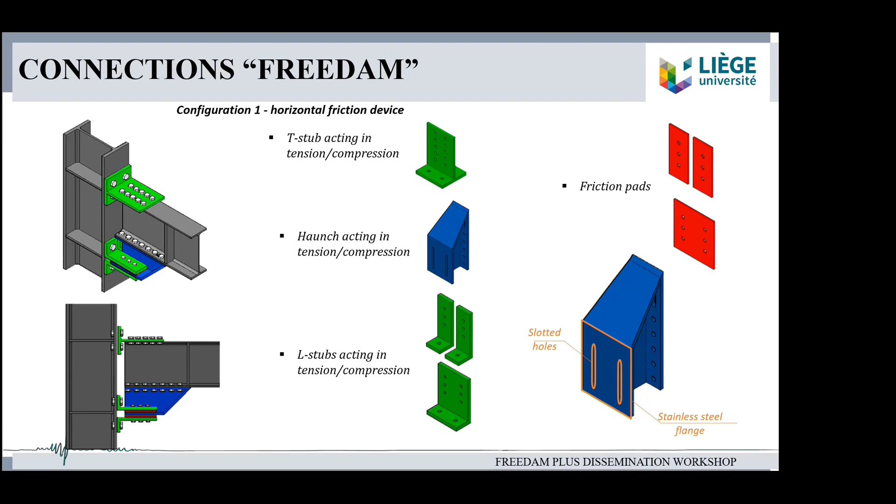Now, a few words about the project itself, FREEDAM PLUS. As I said, it's a project for the valorization and dissemination of knowledge from the FREEDAM project. I forgot to say that the coordinator partner of this project is the University of Salerno, and I will introduce one of his representatives in a few minutes, Massimo Latour, a member of this university, who initiated and is still leading this project.

So, what will be discussed this afternoon? First, the connections themselves, how they are, how they behave, all the studies which have been made to validate their use. We will also introduce some pre-normative recommendations which are completely in line with the Eurocode, in such a way that this material can be used right now, even if the connections for the moment are not directly covered by the code.

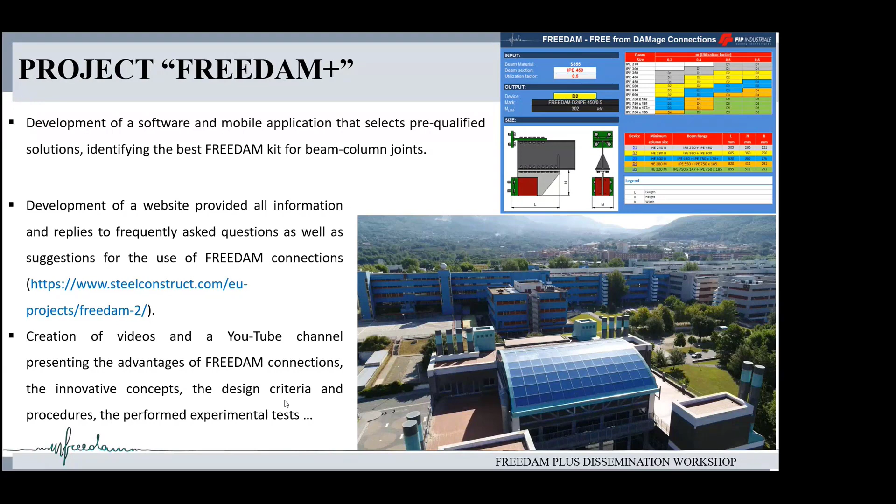And last but not least, there are seminars which will be organized in all the partner countries in Europe, but should also be organized in other non-European countries, dedicated to the dissemination. The Belgian one takes place today, and I'm happy that you decided to participate.

Then you can find information on the experimental campaign we did on friction dampers, on connections, on frames. The numerical work is also reflected. Robustness means that the structure could be subjected to shock, and the resistance of these connections to impact has also been studied.

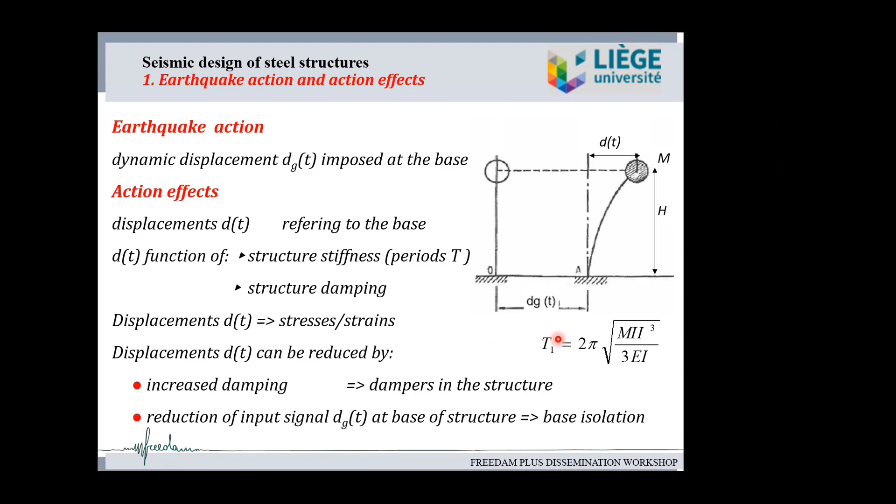Following this relative displacement, there are stresses and strains induced in the structure. Now, the displacement of the structure relative to its base can be reduced by either increasing damping, so having dampers in the structure, or reducing the input signal at the base of the structure—that's base isolation.

Now, in Eurocode 8, there are two levels of earthquake action for design which are considered. One is the ultimate, so it's the design action under which life safety has to be assured. It's a low probability earthquake. The basic one is a return period of 475 years.

For this level, members are designed at an ultimate limit state, and it is considered that at this stage, the structure will have damages, meaning permanent local and global deformations and displacements. Besides that, there is also a service earthquake defined, which is roughly half of the ultimate one, and under which there are drift limitations imposed so that damages would be avoided.

The methods to calculate action effects are basically four. The top one is the dynamic nonlinear analysis, where the action is presented by accelerograms. The members have nonlinear characterization, and the analysis can incorporate nonlinear geometrical effects.

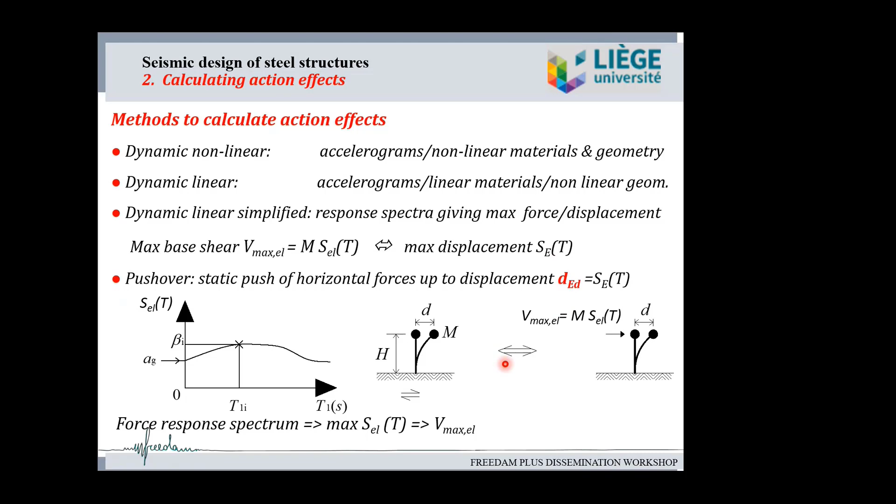So earthquake imposes displacement to the structure, and if we take as parameter the displacement, the design displacement D subscript ED at the building top, it has been shown that this displacement is relatively independent of the member behavior, whether elastic or elastoplastic.

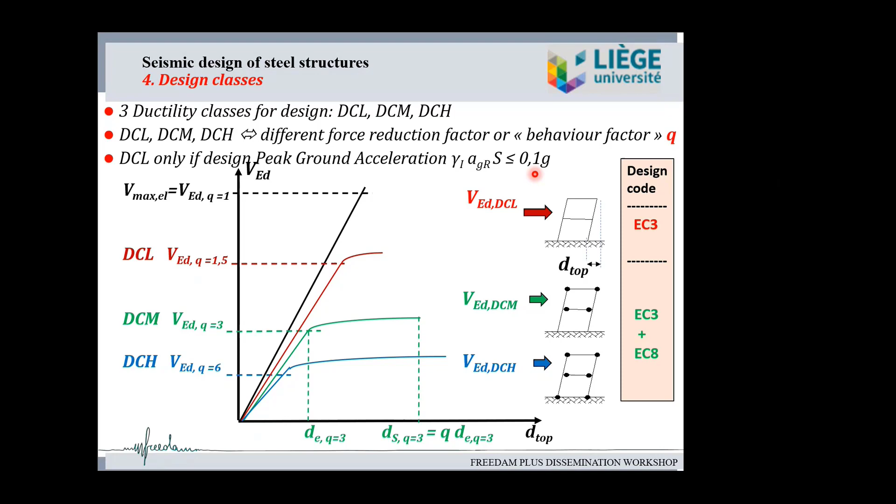The application of the DCL design in Eurocode 8, version 2005, is still limited to a peak ground acceleration, symbol gamma I times AGRS, which is less than 0.1 g, g being the acceleration of gravity.

The conditions for high behavior factor Q are to have many plastic hinges, so a global plastic mechanism, not a soft story, but rather a global mechanism as sketched here, and to have in every plastic hinge ductility, so that they are dissipative zones in the sense that they dissipate energy into alternating plus-minus deformation under forces, so that the graph representing energy dissipation is this parallelogram here at a given stage of displacement.

What are the available mechanisms for local ductility? In steel structures, there are a number of them. You can have local ductility in plastic tension and plastic compression, if the member is not prone to global instability, meaning low slenderness.

You can have local ductility in plastic bending, forming a plastic hinge here. But this requires that there is no early local buckling in the walls of the sections. This is why in Eurocode 8 there is a relationship between the behavior factors you want to use and the class of sections you must use to constitute your structure, in order to avoid premature buckling.

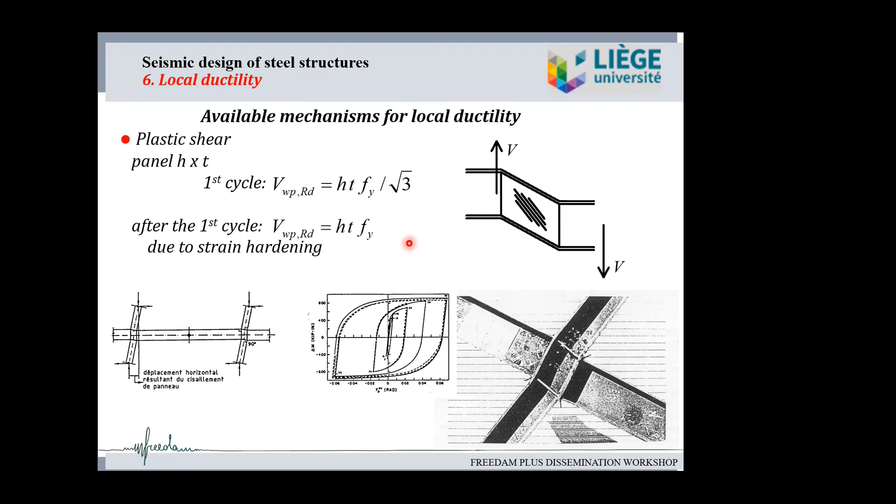But you can point out that due to strain hardening, very soon you get a shear resistance which is simply h times t times Fy, so square root of 3 times greater than the one you calculate with EC3. This will have an impact on the design requirements that will be mentioned later.

Other available mechanisms for local ductility are ovalization of bolt holes, which translates into a rule on overstrength design of bolts in shear compared to hole bearing. Another type of energy dissipation system is sliding at friction, which translates into the necessity to pre-stress bolts in order to create friction and also to avoid shocks in bolted connections under alternating forces F in this connection.

And then there is also the plastic bending or shear of components of the connections, if you are able to calculate their capacity or ductility. Now, what are the effects on local ductility? If you have brittle material or weld, so base material or weld material, it's a problem to develop yielding, especially under shock. The way to mitigate that is to impose a minimum toughness at usage temperature and also weld technique and control of welds. Local buckling is against local ductility, it's a matter of classes of section, as we have seen.

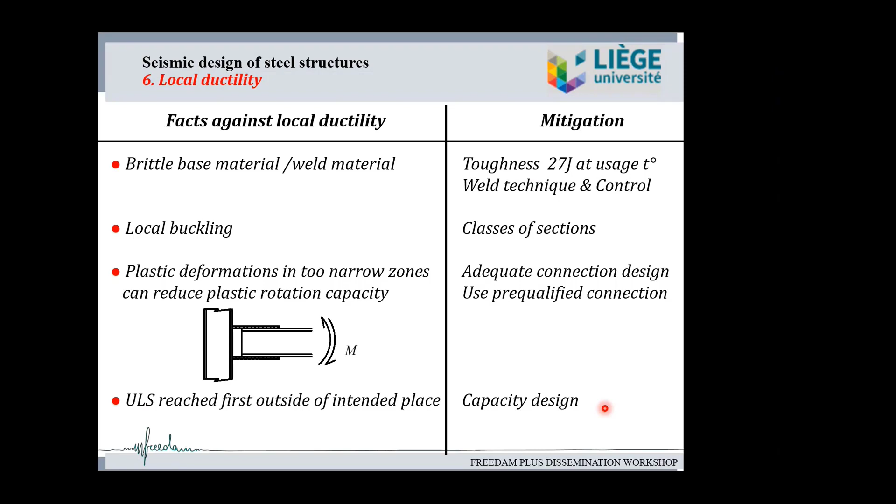Plastic deformation in too narrow zones can reduce plastic rotation capacity. It's a matter of connection design, which can be solved also by using pre-qualified types of connections. And then problems may exist if the ultimate limit state is reached first outside of the intended dissipative zones. This is mitigated by capacity design, a notion that we will explain later.

Coming to the rules for DCM and DCH moment resisting frames, there is a design objective, which is to form a global plastic mechanism with plastic hinges in bending in beams or in beam connections to columns, or in the case of column base, you cannot escape the possibility of plastic hinges in the column at their base, or on top of columns, the plastic hinges may be either in the column or in the beams. It's the same global mechanism.

The design requirement to realize such a global plastic mechanism is to impose a certain condition between the moment of resistance of the columns and beams. Now, at each node of a moment resisting frame, or other frames, there is equilibrium, so the sum of the moment applied in the column is equal to the sum of the moment in the beams. If there is more strength in the columns than in the beams, the beams will yield first, and you will realize this scheme where plastic hinges are in the beam.

Now this 'more' has to be defined. The imposed condition is that the sum of moment of resistance of columns be greater or equal to 1.3 times the sum of moment resistance of beams. So the factor has been calibrated to be 1.3. This condition is the so-called weak beam strong column, or WBSC condition. Note that the MRD beam may be the MRD connection of the beam to the column.

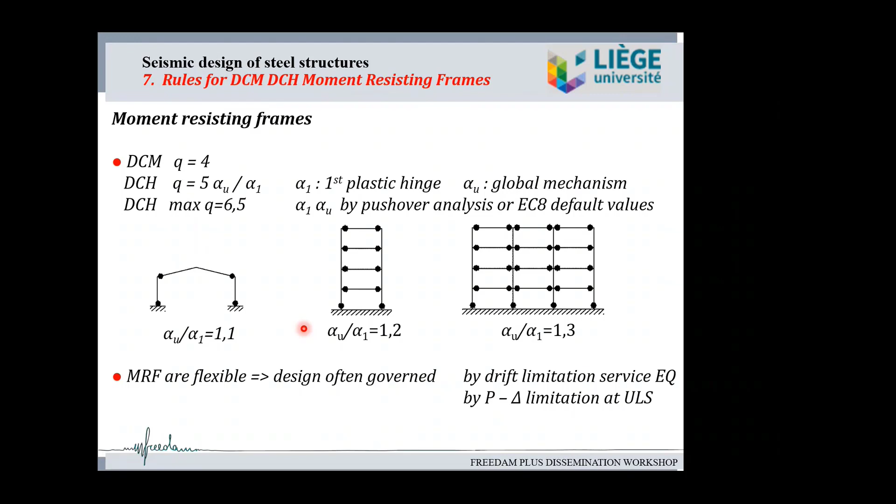Design requirements for beams and joints in moment resisting frames are as follows. First, the strength of resistance should be greater or equal to the calculated action effects in beams. In connections, if dissipative zones are in beams, the connections have to be designed considering that the plastic hinge is indeed formed in the beam, so that the design moment of the connection should be greater or equal to 1.1 times gamma OV times the calculated moment of resistance of the beam calculated with the nominal yield strength. So there has to be an overstrength of the connection with respect to the beam.

The design of the connection, the design action effect for the joint, refers to the plastic capacity of the beam times 1.1 times a factor which characterizes the overstrength of the materials delivered on the market with respect to the nominal yield strength. There is a standard value of 1.25 indicated in Eurocode 8, so that finally the moment of resistance of the connection should be greater than 1.375 times the plastic moment of the beam.

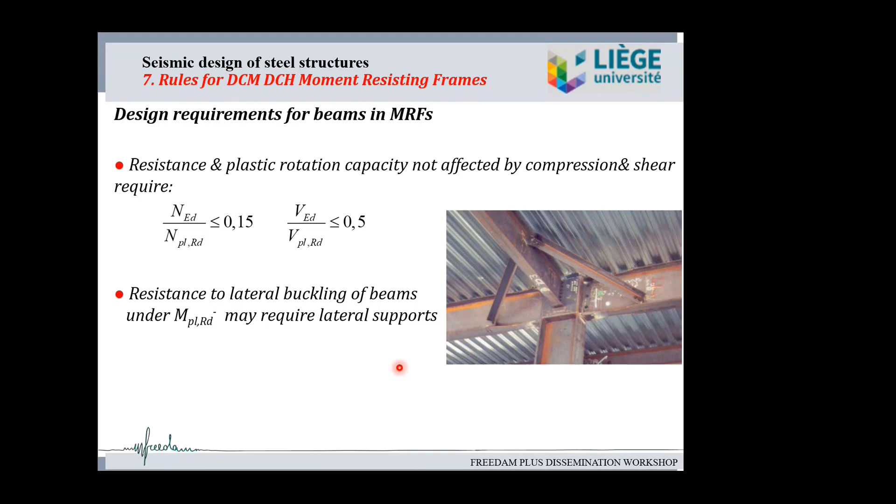Other requirements for MRF are that resistance and plastic rotation capacity should not be affected by compression and shear, which is realized by satisfying these two conditions. Also, care should be taken about lateral buckling of beams and negative moment at supports, which may require having such lateral supports.

For columns, design action effects will also consider an amplification for capacity design reasons. Omega is the ratio of the plastic moment in beams to the calculated action effect, so it's greater than 1. The term from the analysis under seismic situation is amplified by this omega, by gamma OV and 1.1, so that the action effects for design are the sum of two terms: the gravity in the seismic design situation, and the term from the seismic effect, the effect of the earthquake. So again, there is an aspect of capacity design in the design of columns.

Shear in columns should be limited to 0.5 times the plastic strength of columns, and the shear resistance of the panel zone should be like this. So it means there is no capacity design in this case. The reason, as I mentioned before, is that if there is yielding in the panel zone, due to strain hardening you will very rapidly have an increase compared to the standard shear resistance of panel zones, so we take advantage of that by not amplifying here, using the calculated shear resistance based on Eurocode 3.

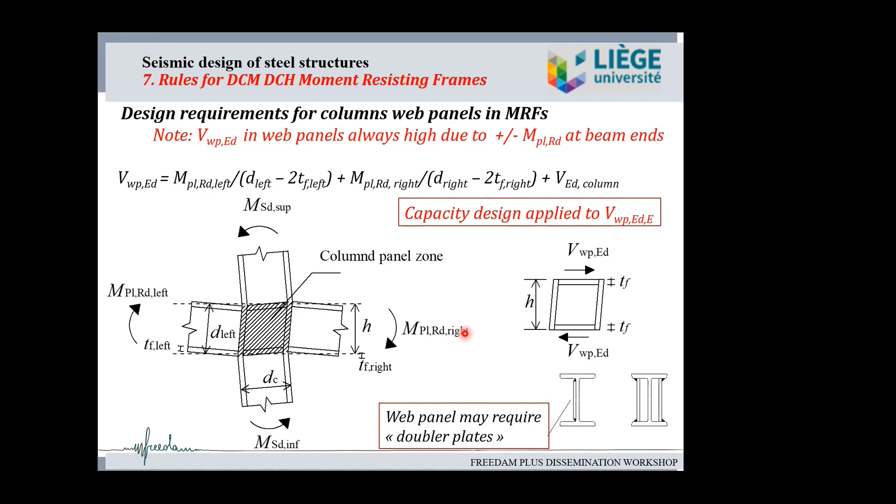Web panel zone: shear is always high in web panels, because if you have plastic hinges in beams or their connections, you get an effect like that under the seismic action effect. So there is a strong action effect in the panel, and this may require increasing their resistance by applying a so-called doubler plate or multiplication of webs in the panel zone.

For connectors, as I mentioned, we want to favor some dissipativity by having the bolt shear resistance greater than 1.2 times the bearing resistance. This should be developed in at least one connected wall or assembly plate, with the objective being the ovalization of bolt holes.

Category B and C should be used for bolting joints in shear, and pre-stressed connections should be used in all connections of the main structural frame. Surface preparation may be class B, so not blast sanding - it can be alkali zinc silicate paint on a prepared surface. Slippage in connections is allowed. This is more realistic than sandblasting - I can explain more about that.

Full penetration butt welds are considered as having overstrength if there is preparation of joints, so groove machining and good execution. The yield stress of the weld material should be equal to or greater than the yield stress of the base material, and the same applies to the toughness of the weld material. The partial factors are those of the persistent and transient design situation, shown here.

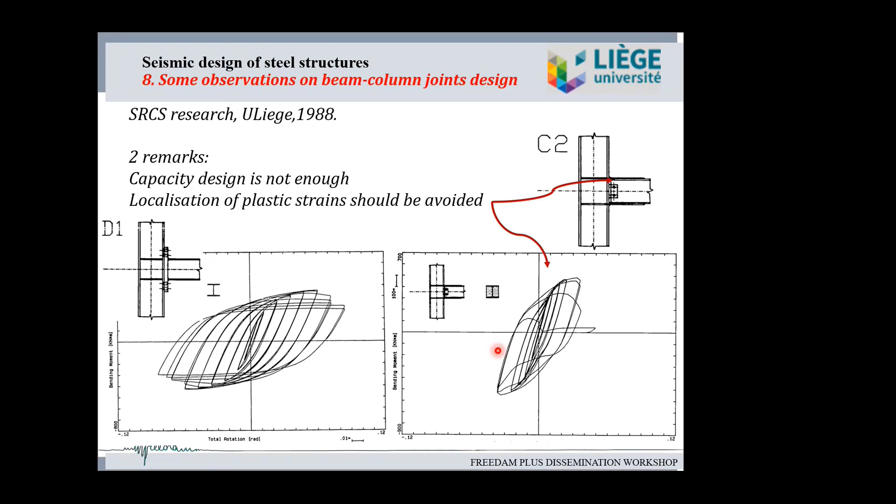Two remarks: capacity design is not enough, localization of plastic strains should also be avoided. I'll explain more, and you'll see that the energy dissipated can be quite different - a well-designed connection compared to a badly designed one. Why badly designed? Because it's not enough to say the connection strength should be greater than the beam plastic strength. You also have to consider that plastic strains should not be localized in narrow regions.

If you have a design like this with cover plates, there are three levels of strength: the plastic strength of the beam, then the plastic strength of the beam plus cover plate, and then you have a drop - you have the plastic strength of the narrow zone here.

If a bending moment is applied, as sketched here by this line, the place where strains start yielding first will be the one where the ratio of resistance to applied moment is lowest, which may well be in these localized regions.

In such a case, all the plastic extension takes place in a narrow zone. In the calculation here, it's assumed 10 millimeters with an epsilon of about 2%, meaning an elongation of this narrow zone of 0.2 millimeters. So the plastic rotation, the ratio of this elongation to half the depth of the member, is 1.2 millirad, much less than the 25 millirad requested for DCM design.

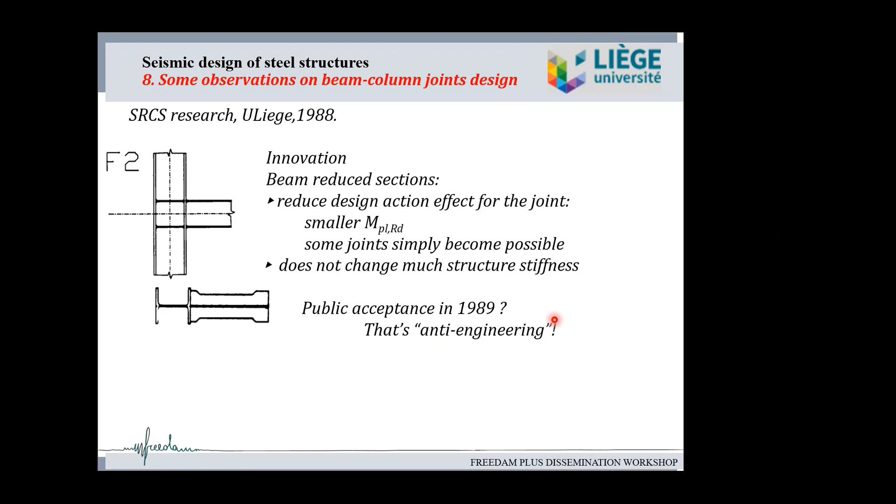The public acceptance of this idea in 1989 was just to say that it's anti-engineering, so it did not have much success at the time.

Then came the Northridge earthquake in 1994, where beam column connections were cracked or failed by the hundreds. The main features of these defects were local cracks in the welds, because the welds were made on a backing bar without remelting the root of the welds.

Another aspect was that in the resisting sections, a bolted shear tab was mixed with welded flanges, so that in reality shear was going through the weld of the flanges, not through the shear tab. This was part of the problem.

Another aspect was the low toughness of base and weld material, bad welding techniques, and protection of weld by gas shield not being adequate in open wind conditions, so the design conditions for moment connections in the US had to change a lot at that time.

These changes were basically to copy what we already had in Europe for a decade, which were toughness requirements. Other aspects were through-thickness tests, especially for thick sections, and conditions for the design of joints.

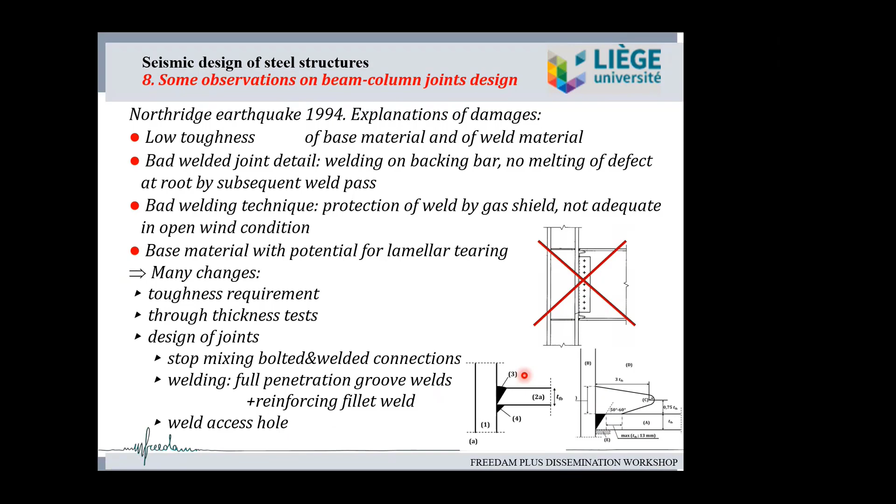This included not mixing bolted and welded connections, welding using full penetration groove weld with reinforcing fillet weld, and a specific aspect of the design of the weld access hole.

Another thing was the emphasis on separating the stresses of the connection from the stresses of the plastic hinge, by moving the plastic hinge away from the column.

There were two ways to do that: one was to strengthen connections, and the other was to weaken the beam - the Liege 1988 idea, which became quite a success. Here you see some constructions in the Los Angeles area. The thing is now commonly called RBS, also dog bone.

I can say that 30 years after we did that in Liege, people are still doing research on the best way to design dog bones and so on.

Now, one question: why is this weakening of beam not anti-engineering? How is it possible to do that without losing money, because you throw away some material?

Well, it's not necessary to use bigger sections if you remove some material, because these reductions of section are very local, influencing only slightly the stiffness, the P-delta effect, the period of the structure, and the action effect. Also, dimensions of beams and columns are often decided by stiffness, so frames anyway possess overstrength, and losing some ultimate resistance locally is not a problem.

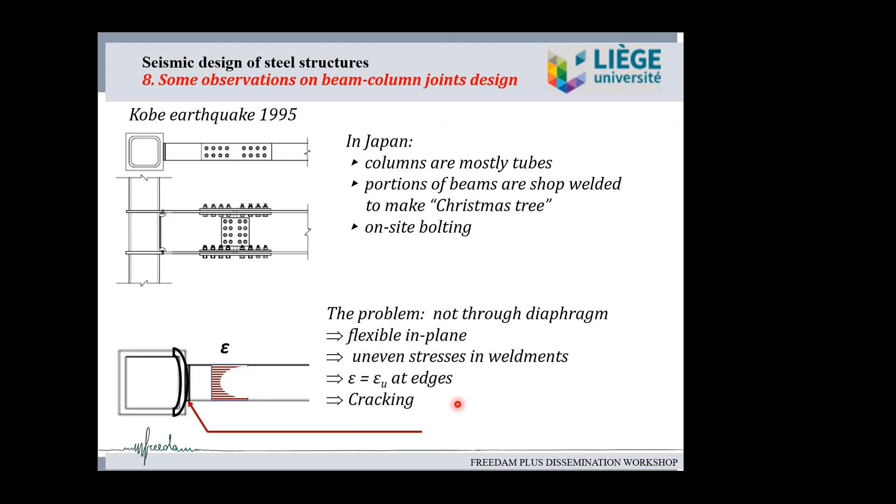Now, some few words about other steel structures and moment resisting frames. Concentrically braced frames, or CBF: the global mechanism you refer to is not one in which you would buckle in the columns or buckle in one single diagonal, so it has to be numerous dissipative diagonals.

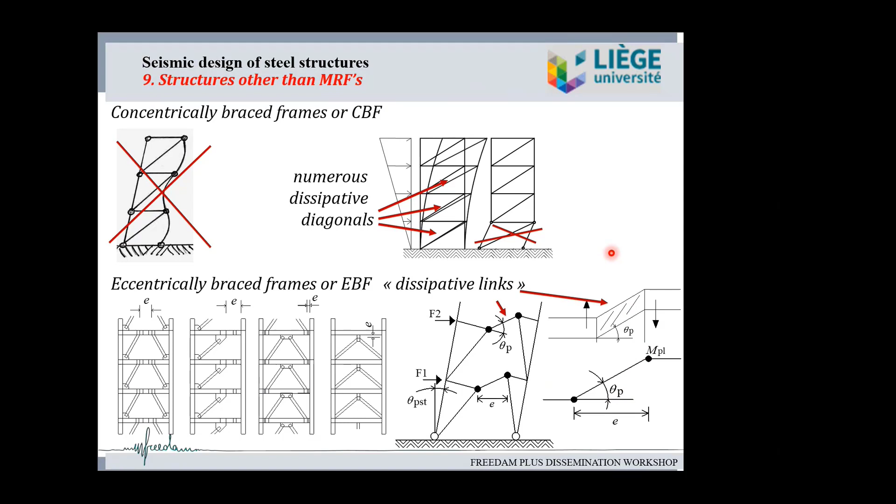Another type of braced frames popular in seismic regions are eccentrically braced frames, or EBF, where energy dissipation takes place in links connecting two triangular parts, and these dissipative links may dissipate in shear or in bending. So that's the design objective, as I just explained.

The design condition for having multiple dissipative zones is to have regularity in the ratio of strength to action effect from bottom to top of the structure: so NRD to NED in CBF, VRD over VED, or MRD over MED in EBF.

Now, for the other members in those structures, they are capacity designed with reference to the NRD of the diagonals in the case of CBF, and capacity designed with reference to the shear or bending moment of the links in the EBF.

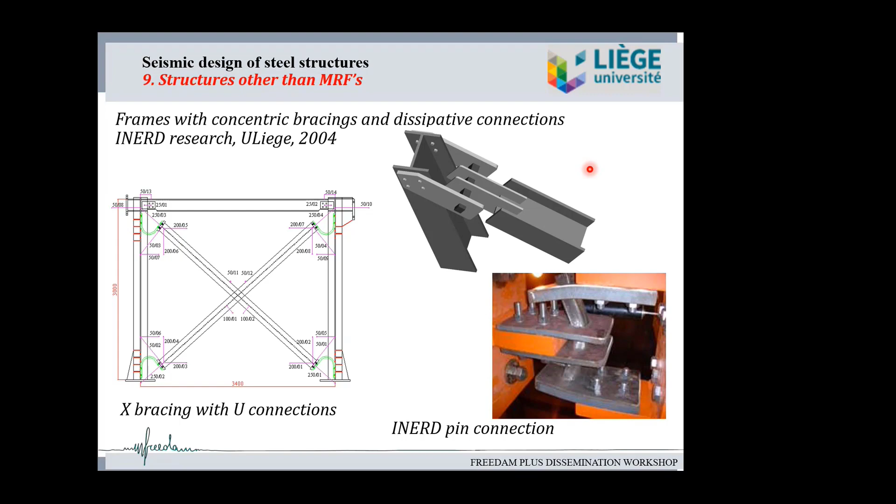A few words on other developments about dissipative connections. The INERD project, led by University of Liege, was the opportunity to develop two types of dissipative connection: the U-shaped connection and the INERD pin connection, an idea by Professor Ioannis Vayas from University of Athens. And there are rules applicable to design such connections.

Now, I will conclude by giving some light on the future. The revision of Eurocode 8 is ongoing. The revised Eurocode 8 will be operational with its national annexes in 2028 - that's not tomorrow. But in 2022, the part on steel and composite structures is already, I would say, 98% finalized.

This section considers all the remarks and concepts which I presented before, and this new Eurocode takes into account research developments in the period from 2004, the existing Eurocode 8, till 2022, so that's today.

In particular, research on full strength, equal strength, partial strength connections, specific dissipative connections like the INERD pin, which I mentioned, friction connections like FREEDAM, which will be explained in the next speeches, lightweight steel structures, and also a new thing: this revised Eurocode 8 provides standard data for pushover analysis.

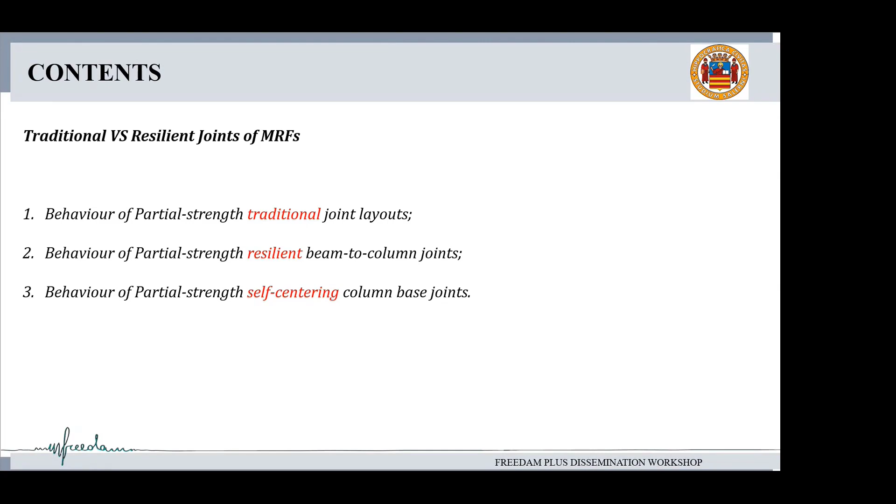I will touch on three points in my speech. First, I want to introduce the behavior of traditional joints when designed to be partial strength, with resistance lower than the connected beam. Then I want to present smart joint solutions, in particular resilient types of beam-to-column joints, again with resistance lower than the connected beam—I will present different solutions to achieve this resilience. Afterwards, I want to introduce recent developments from research into even more advanced joint typologies which assure the self-centering of the structure.

When dealing with the design of joints for moment-resisting frames in seismic areas, the design can follow two opposite approaches. First, the strong column, weak beam, and strong joint philosophy, where the idea is to dissipate all the seismic energy into the beam, as explained before—we have criteria which assure this energy dissipation in the beam. Conversely, the current framework of the Eurocode allows, under certain assumptions, the design of joints to be partial strength.

There is a very big difference between one philosophy and the other, because as underlined in the previous presentation, when dealing with partial strength joints, the variability of the cyclic response is very strong and very dependent on the connection detail. So we may have different joint solutions with similar resistance or stiffness, but very different energy dissipation capacity.

Just some reference to the current Eurocode framework: currently it's possible to use partial strength joints only if the rotation capacity of the connection is shown through experimental testing, with requirements for ductility capacity depending on the ductility class. So currently, in the present framework, it's not easy to apply a partial strength joint in everyday practice, because it requires experimental testing. At the moment it's not easy to conceive a partial strength joint due to the limitations required for knowledge of joint behavior.

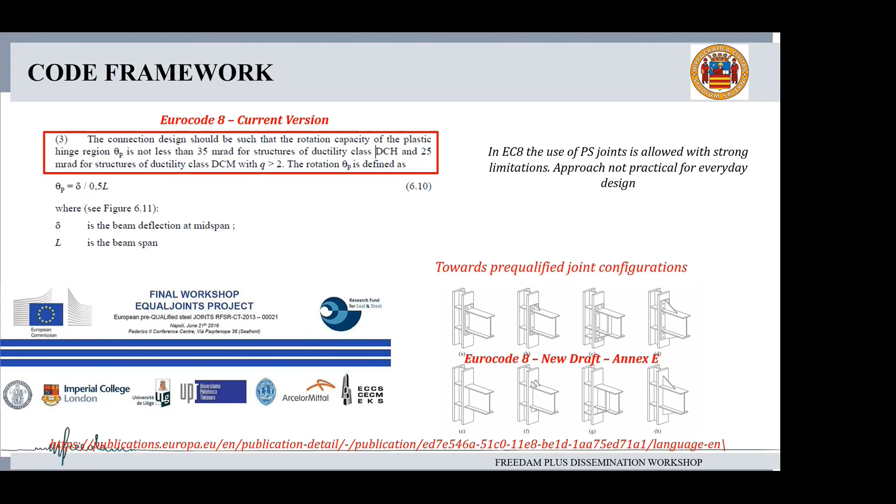In the next revision of the Eurocodes, we are going towards pre-qualification of joints. Some typologies will be included which are pre-qualified, meaning technical requirements will be specified. I'm happy that friction joints will be included in this annex containing detailing rules and specific design rules for assuring the minimum rotational capacity required. This philosophy of pre-qualifying connections is borrowed from US practice, where pre-qualified connections have existed for many years, documented in AISC documents with many different typologies of pre-qualified connections.

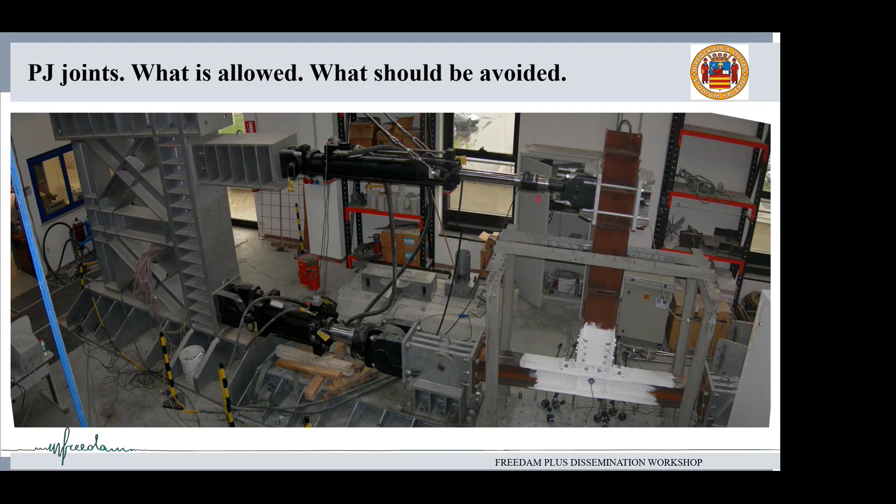Some of these typologies are based on smart solutions, which, as I will explain later, basically imply the use of dampers in the connection—either yielding dampers or friction dampers. Related to the behavior of partial strength joints, I first want to underline the main aspects involved in the behavior of a traditional configuration of partial strength joints, and how the use of dampers in joints is justified in light of these outcomes.

When we are dealing with partial strength joints, meaning the joint is less resistant than the beam, under a significant earthquake the capacity design rules are aimed to dissipate energy into the joint.

Clearly, when deciding how to dissipate energy into a joint, we have to clarify how the hierarchy among the different joint components is established, because we want the weakest element of the connection to be able to dissipate a large amount of energy while assuring minimum ductility. So it is important to establish which are the dissipative components of a joint and which are the non-dissipative ones.

This was also explained in several slides of the previous presentation. Typically, weldings or bolts are not considered dissipative components, while it is possible to rely on other sources of energy dissipation in joints, for example the panel zone or plates subjected to bending.

I want to show you some results of tests we carried out in previous years on different joint typologies characterized by similar stiffness and strength. This highlights how the behavior of a partial strength joint is strongly dependent on the weakest joint component, the connection component characterized by lower resistance.

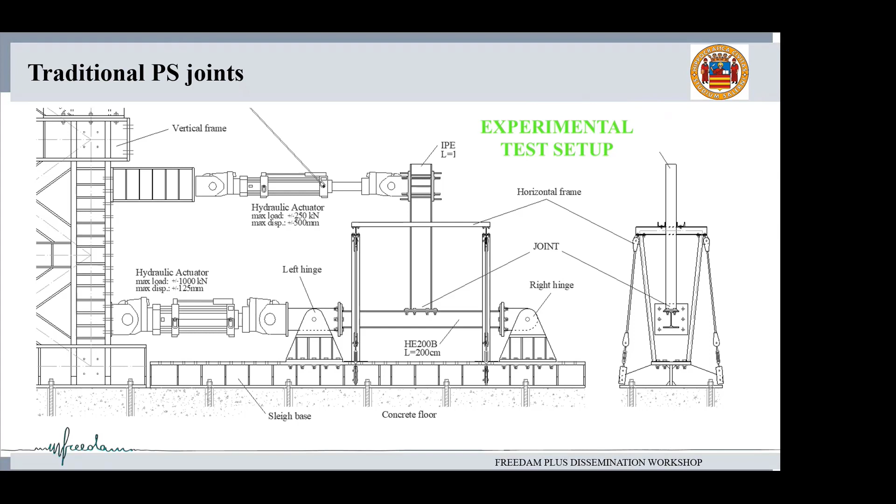In this test, we apply an axial force in the column with the lower actuator, and bending in the beam and consequently in the joint with the other actuator, the upper actuator.

The configurations I'm briefly showing are characterized by different design criteria, highlighted in some of our publications, but basically grounded on the component method, trying to establish a hierarchy between the different components so that some components are always overstrength compared to others.

The first joint typology I'm showing is one where the design is aimed to dissipate energy into the column shear panel.

The second connection, here I'm summarizing the design criteria. You have the slide available on the website, but I'm not going into the detail of the design now.

The second connection, a bolted extended end plate connection, is characterized by a different approach, involving the design of a weak end plate and a strong panel zone.

This is achieved by strengthening the panel zone with continuity plates, which remove the deformability of the panel in tension and compression, or the column web panel, which removes the deformability of the panel zone in shear, the column web in shear.

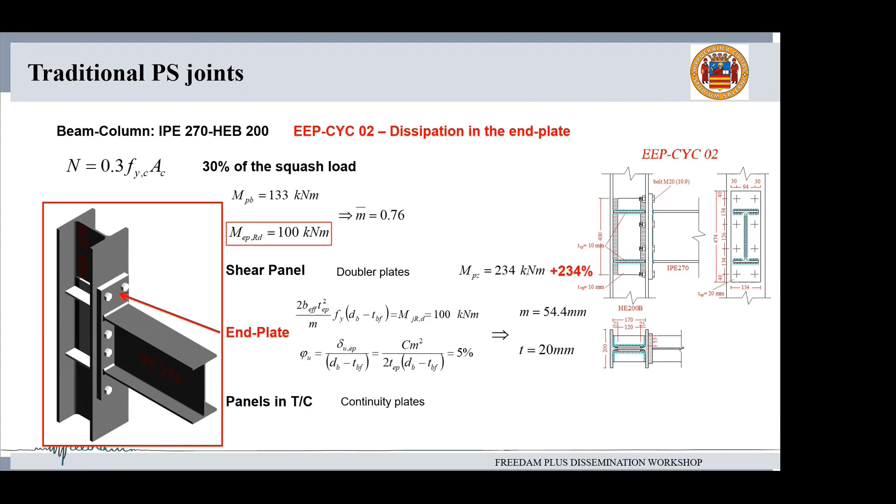Similar typologies have also been tested with the reduced beam section strategy, to compare results of different layouts. All these layouts, as I've said, are characterized by the same resistance.

The strategy here implies removal of part of the beam material to concentrate the plastic damage far from the connection. In a last version, we are testing a solution with double split T-joints.

This is a connection where the design is aimed to have plasticization possibly only into the T-stubs, which in this case work basically as a yielding damper, an element dissipating energy by hysteresis of the steel plates subjected to bending.

In this video, I'm showing the hysteretic response of the test and the video of the test, which highlights with whitewash removal from the joint the areas of the connection that are more stressed.

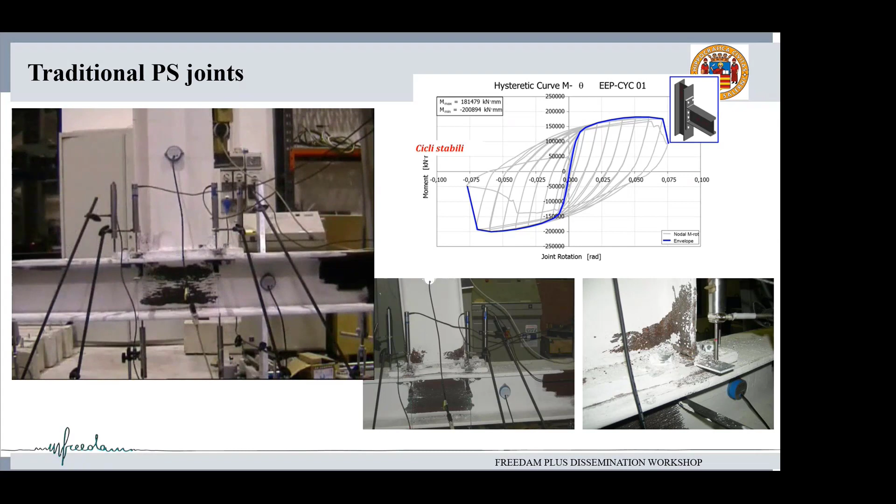In this solution, as you notice from the distortion of the shear panel, the joint is designed basically to dissipate in the shear panel.

This usually results in hysteretic cycles which are able to dissipate a large amount of energy.

But on the contrary, as you see from the type of damage here, there might be a problem in substituting or repairing the elements of the joint, because they involve parts of the column, which are obviously not easy to repair when a strong seismic event occurs.

This is the second solution, which I was summarizing previously, where basically we wanted to have damage into an extended end plate element. In this case, we noticed that clearly also this connection is able to dissipate some energy, also to achieve rather large ductility rotation capacity, which in any case is much lower than what we have seen in the previous case.

There is a particularity in that the hysteretic cycles in this case are characterized by what we call the pinching phenomenon, a reduction of the energy dissipation capacity, which in this case is due to plastic deformation of the bolts. These are phenomena typical also when there are contact forces involved, as we have in this case.

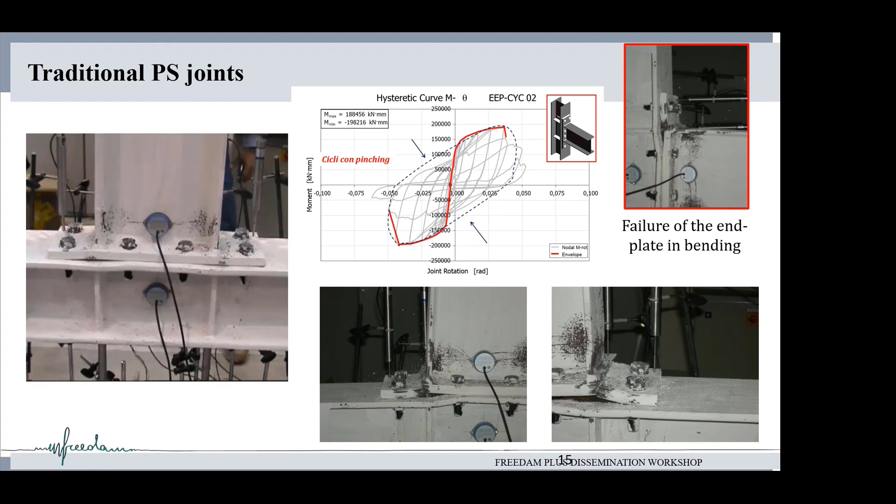For the RBS joint, which is the strategy, I think the first strategy that was ever proposed for partial strength connection, basically we concentrate the damage all in the beam. This is a strategy which was already largely applied in practice, very effective in avoiding any problem in the joint, concentrating the damage only in the beam.

Clearly, also in this case, there may eventually be a problem of repairability of the joint, but the performance from the seismic point of view of these typologies is really excellent from what we see from the hysteretic diagram, from the moment rotation diagram of this connection, where we notice always a large rotation capacity of the joint and also a large energy dissipation capacity.

The last partial strength connection which I'm presenting now here, with double split joint, is interesting because it is highlighting in this case a strong column web panel and a weak T-stub, which is used to connect, in this case, the beam to the column.

In this case, the T-stub is working exactly like a yielding damper, so basically we dissipate the energy through the yielding of the plates. This connection is already highlighting an advantage, which is practical and technical, which is eventually the repairability of the element, because in this case we imagine it is more efficient and easier to substitute the T-stub, which is the only source of energy dissipation capacity.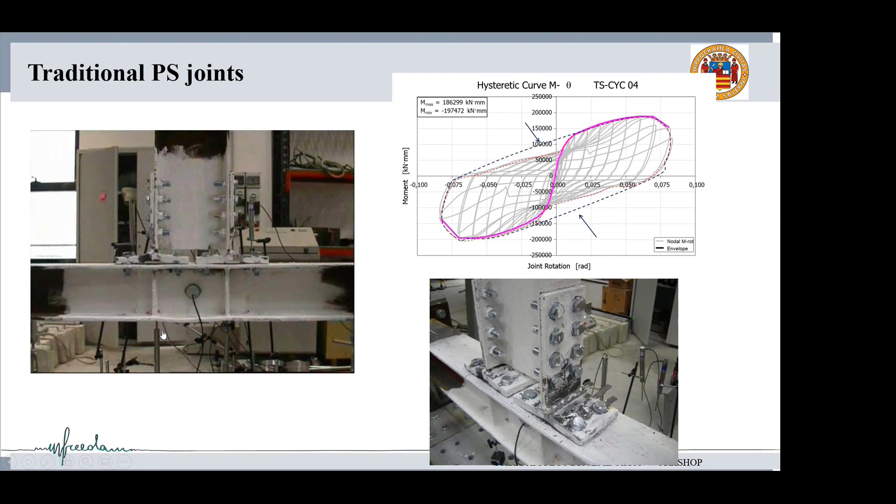Nevertheless, on the other hand, if we look at the hysteretic diagram again, compared to the case where we dissipate energy in the column web panel or into the RBS or into the beam, we may be able to achieve a large rotation capacity, because in this case we notice this is about 70 milliradians, which is much larger than what is required by Eurocode 8. Nevertheless, the energy dissipation capacity is not optimal because it is still characterized by some pinching phenomena.

If we compare the behavior of these connections, which I underline again, they are characterized by the same resistance, but as we have seen, different energy dissipation capacity, which is just the result of the hierarchy that we establish in the design of the joint components of the different connections, making a kind of ranking of the energy dissipation capacity of the different connections. The RBS will be the winner of this competition, which is not really a competition, but just gives general understanding about the behavior of joints.

The column web shear is also a component, and connections designed to dissipate in the column web are typically able to dissipate a large amount of energy, but obviously in both cases we might have a problem of repairability, more in the case of damage in the column web shear. The connections which dissipate in T-stub or end plates, in bolted plates, are able to dissipate a large amount of energy, but typically much lower than what we can achieve with the other solution.

But there are a set of problems that in any case we immediately highlight when we look at the behavior of these joints, which are let's say the current partial strength joint solutions, the more traditional partial strength joint solutions. So we have noticed that in any case we have always the yielding of some elements, obviously this yielding will happen only in case of ultimate limit state condition.

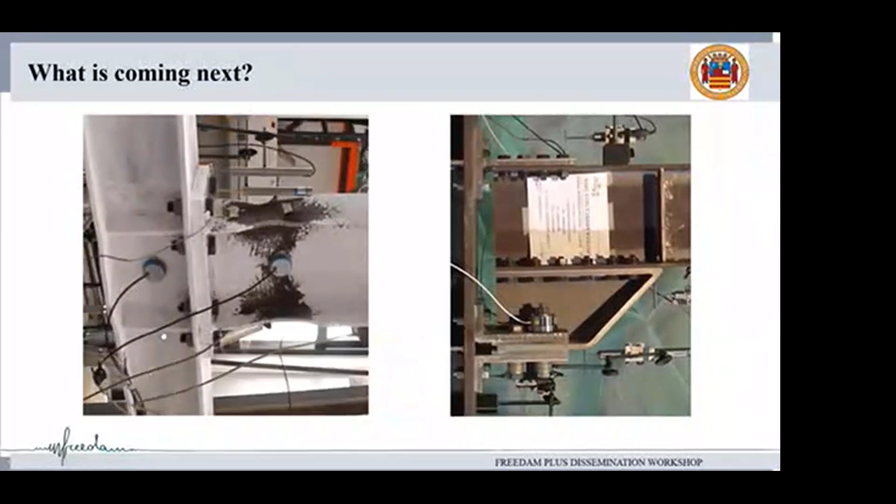This is the FREEDAM joint, where compared to traditional typologies, through the addition of a friction damper in the beam-to-column joint, we are able to substitute the traditional dissipative area with an alternative dissipative area, which is a friction device. This strategy can also be fulfilled with other types of devices, such as yielding devices.

The concept is that a joint, to be resilient, has to be designed so that it doesn't need any repair, or if there is damage in the connection, the damage has to be easily repairable. So there is a great wealth of typologies of innovative joint topology.

If you look at the research done over at least 10 to 20 years, there have been a lot of proposals for resilient connection typologies. More classically, these proposals involve the possibility to include into the connection, into the joint, some yielding dampers.

This is the case, for example, of the slit damper connection reported here, where the beam is connected to the column with an upper T-stub, which fixes a center of rotation into the connection, so as to dissipate in bending into a slit damper, a yielding device able to guarantee sufficient energy dissipation capacity and ductility.

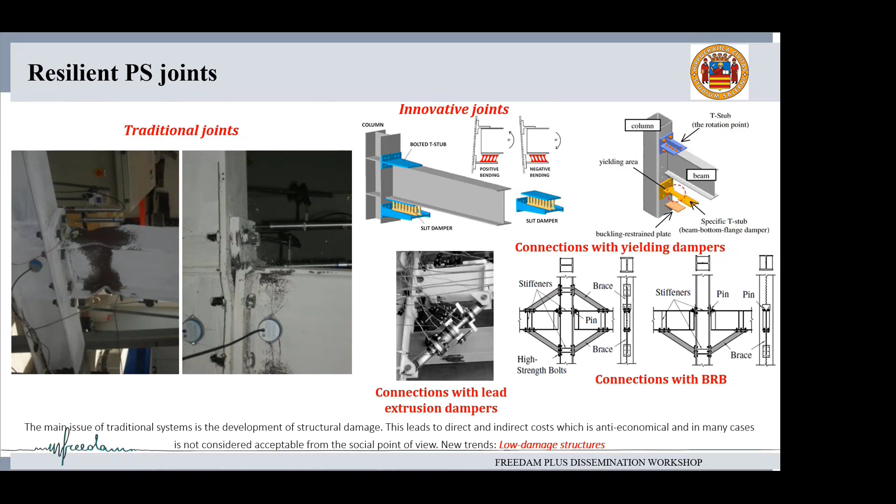All these strategies basically achieve the same objective, which is concentrating the damage into an element that is able to dissipate well, and an element which can be repaired or substituted very easily.

In the US, there are also companies selling this solution. So we want to have similar things in Europe too. This is the case, for example, of a famous United States company which is basically selling a partial strength solution employing as a yielding damper the same concept I showed you in the previous slide.

This type of joint is also contained in the pre-qualified list of connections in US practice, and very soon we will have something similar in the Eurocode, which is a great benefit for designers, who will have much more information related to the design of joints.

This is another concept that was presented about 13 years ago at the University of Salerno, based on a similar approach to the other connection shown before, but basically modifying the capacity of these joints to dissipate energy just by cutting the plates with a particular shape.

Basically cutting the plates in such a way that a better spread of plasticization can happen into a plate in yielding.

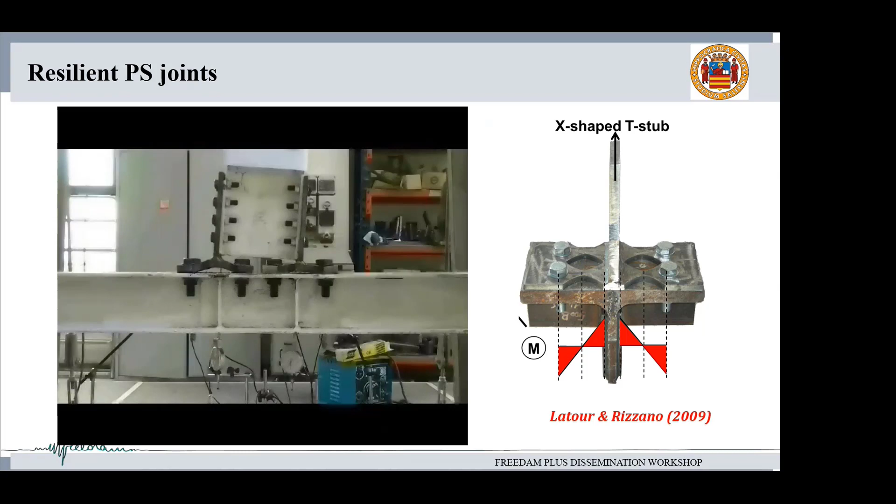Comparing this solution, again based on a yielding damper in a traditional beam-to-column joint layout, we notice the possibility to increase the energy dissipation capacity, the low cycle fatigue resistance of these typologies, basically doubling the energy dissipation. So the performance in terms of energy dissipation capacity was doubled with a very simple approach.

Now I want to move to the main topic of this workshop, which is friction joints. Friction joints were developed starting from a work of Popov.

Okay, so they were developed initially in a work of Popov during the 90s, and subsequently they were studied very deeply by Professor Charles Clifton at the University of Auckland and by all his research team, and they are still doing many studies on these typologies.

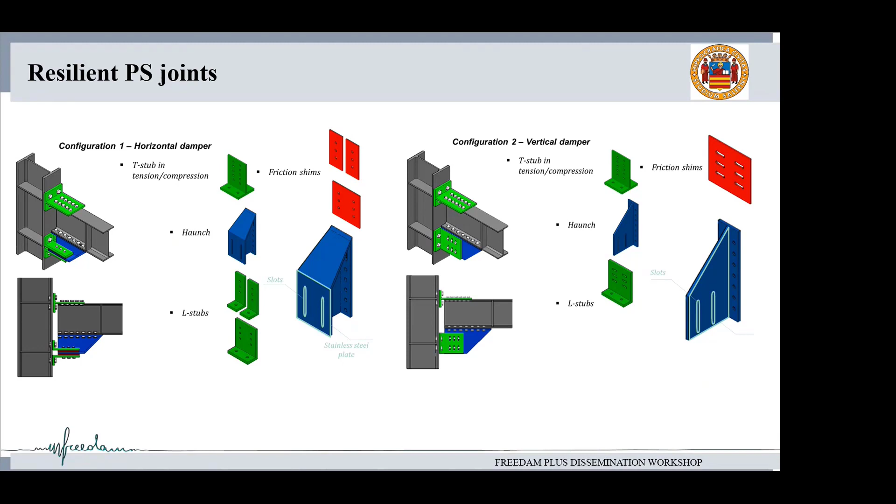We have tested during the project two different configurations of friction joint, which are reported here: a configuration where the friction damper is parallel to the flange of the beam, and another configuration where the friction damper is vertical, parallel to the beam web. The idea is very similar - there is no conceptual difference between one case or the other. There are some specific aspects involved in the design which may be accounted for in the two different configurations, with specific detailing rules we have established during the project.

From the point of view of designing this connection, it's not different from the typical concept we apply in any capacity design approach. Basically, the idea here is reversed, because typically we design the beams, which will be our dissipative zone, and then overstrength the joints and columns. In this connection, we establish a different hierarchy.

We want to dissipate into the friction damper, so we design it to slide at the ultimate limit state condition, not in other loading situations. Once we establish the overstrength of the friction damper - a parameter studied during the project - we can design all the remaining parts of the structure. So the hierarchy is different: the joint is the dissipative part, and the beam and column are designed to be overstrength compared to the joint.

From the many examples we have carried out, we have shown that it's very easy in reality to overstrength columns and beams with a pretty straightforward design procedure. The resulting weight of the structure is not very different from the traditional design approach, so what we have here is just higher resilience for the same cost.

This is the behavior of the two typologies. What we observe here is that we are able, with this connection, to achieve really wide, regular, and very stable cycles. So this connection dissipates the largest possible amount of energy, which is what we get with the rectangular hysteretic cycle, with a resistance that can be very easily predicted.

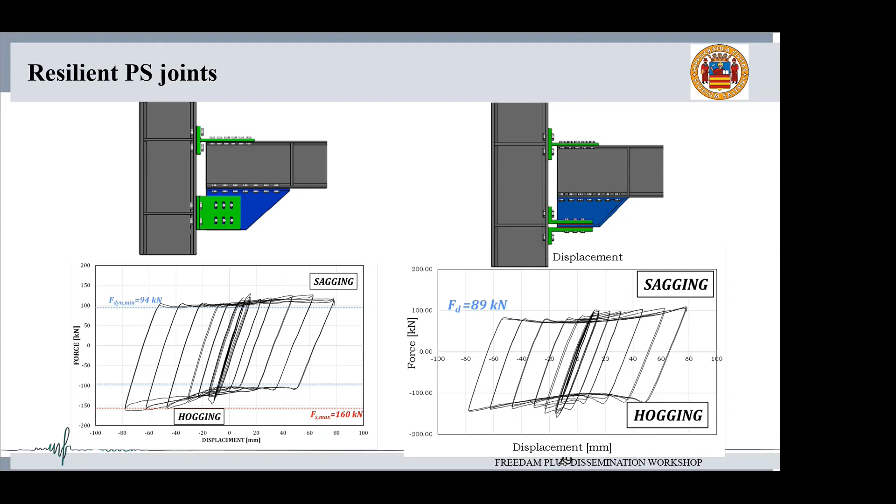So we have established a set of design rules. Maybe something is also reported in the next presentation, I don't quite remember, but in any case there are informative documents of the project available on the ECCS webpage, where you can download and read a lot of information related to this joint.

When we compare the behavior of this connection to the behavior of all the previous joints we have seen before, we observe a much larger energy dissipation capacity, highlighting the possibility of more favorable energy dissipation for the whole structure.

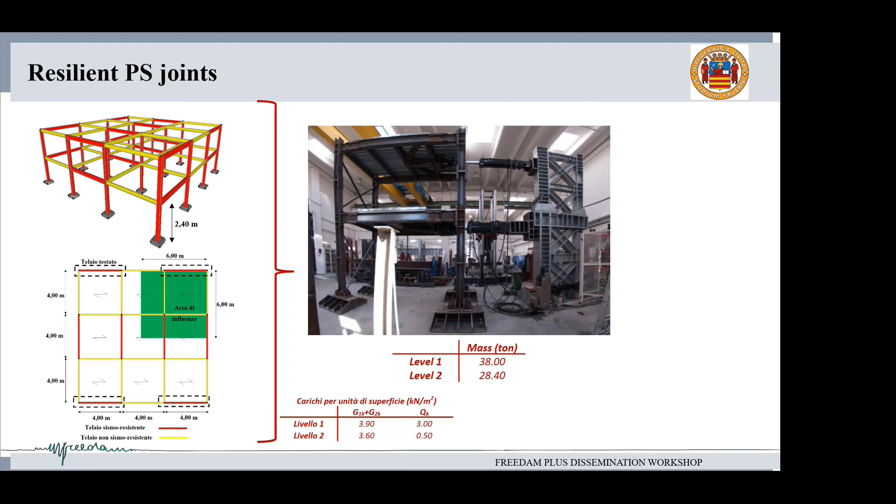These results were reflected not only in the component tests we carried out, but also in tests on real scale structures. In particular, at the end of the research project we performed a test on a frame of 2 stories with 1 span. The test was carried out with the so-called pseudo-dynamic testing technique, a quasi-static technique where the damping and mass matrices are simulated, while the restoring force of the structure is measured directly during the test on the specimen. This is just to give you an overall view of what we have achieved.

You will notice the sliding on the FREEDAM joint at a certain point.

What is important to highlight here is not that the performance of a structure with a friction joint is much different from a traditional structure, but what is important is the result at the end, because a structure with friction joints, with free-from-damage joints as we have called this connection, will result in a structure that basically shows no significant damage.

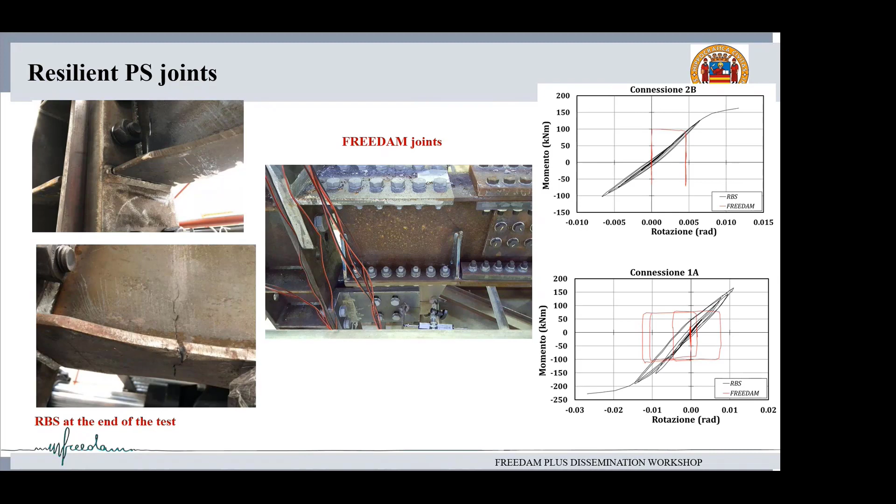So a structure where possibly the only small damage may be a loss of preloading of the bolts, or some damage to a friction plate - a damage which in any case is always easy to repair. From the point of view of overall performance, what we have noticed is that...

Since there is a larger energy dissipation capacity, resulting in a larger equivalent damping of the structure, typically a structure with a FREEDAM joint gives rise to a reduction of displacement of about 35%.

Nevertheless, a big problem is that these structures are not self-centering, which is what you notice when you see in this diagram a residual displacement in the building. So we are doing some other work, and other researchers have also been working on the problem of self-centering steel structures.

This is studied in different ways on different levels. I wanted to give you a few slides about what we have done on this topic and what we want to do in future research projects.

A possibility is to facilitate the self-centering of a structure through the column bases. The column bases show the same limitations as the beam-to-column joint, because we may have full strength or partial strength column bases where damage may occur in the column or in the end plate of the column base joint.

The drawbacks and limitations are the same, so the damage in this case will also be difficult to repair. So there are a set of approaches recently studied for self-centering of the column base joint through the introduction of post-tensioning forces.

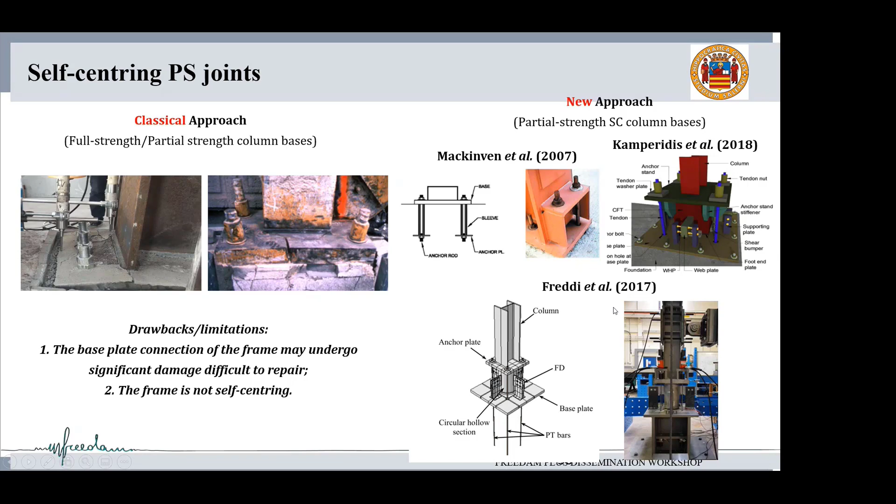There are different applications, again employing yielding dampers or friction dampers. At the University of Salerno, during the research project FREEDAM, this activity was carried out: we studied the possibility of creating a dissipative splice, a dissipative column-base splice, again with a friction damper and a system of elastic bars properly designed to self-center the column-base joint.

The concept is that we dissipate energy with the friction damper, and we self-center the column-base joint with an elastic force always applied by a threaded bar - though it could also be a PT bar - which is initially post-tensioned to create a decompression bending moment in the connection.

Having a self-centering joint will facilitate the self-centering of the whole building; this is the typical objective when designing a self-centering joint. Basically, we want a decompression moment. Having a decompression moment given by a threaded bar will result in a hysteretic loop defined as a flag-shaped hysteretic loop. What we have is a connection which, during the hysteretic behavior, will always pass through zero rotation with zero bending moment. This makes this connection self-centering.

There are certain design criteria which I'm not going into detail now. I just want to show you some of the main experimental responses of this joint.

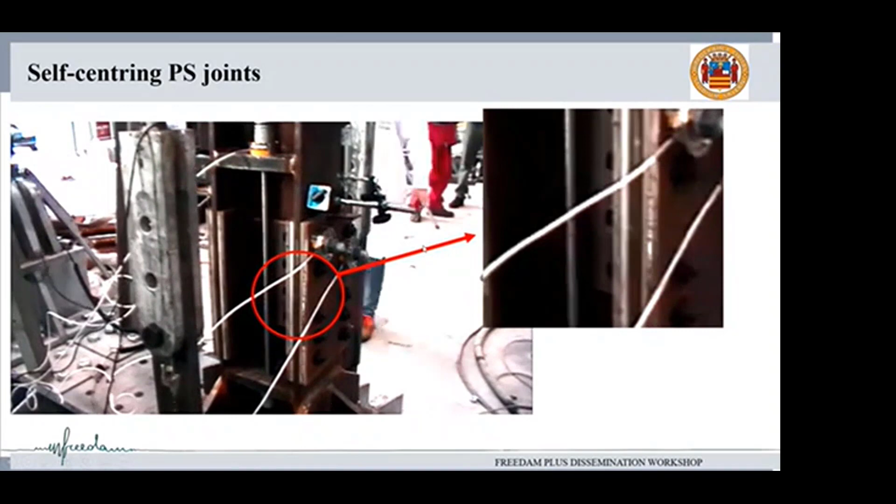This video isn't of very good quality due to a recording issue, but it shows the concept of this connection under bending into the column. The connection opens a gap into the splice, dissipating energy by sliding off the friction damper, and returns back to the initial position due to a tying force, which always pulls the connection back.

This is what we obtain - again, some capacity to dissipate. A behavior characterized by this specific property, which is the self-centering capacity.

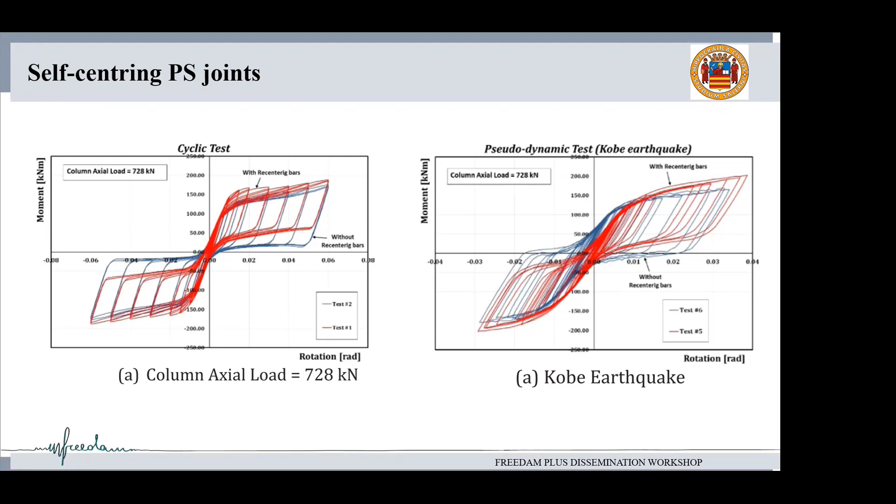This self-centering capacity for these typologies was demonstrated again with cyclic tests and pseudo-dynamic simulations. We have also done simulations of structures employing column-base joints and friction joints in the elevation, without any self-centering capacity in the beam-to-column joint.

The analysis shows that employing a self-centering column-base joint allows the self-centering of the whole building for structures up to 3-4 stories, not larger than that. This self-centering capacity is observed in these diagrams.

These are the displacements during a time history analysis, showing what we should observe under a seismic event for two different stories of a building. For a moment-resisting frame with friction connection - the red line - which is not able to go back to the initial position, compared to the same frame where self-centering capacity is provided to the column-base joint.

The difference is that if we start from the initial position, after the sway displacement usually observed during a seismic event, the structure with self-centering capacity will be able to go back almost to the initial position at all the different stories.

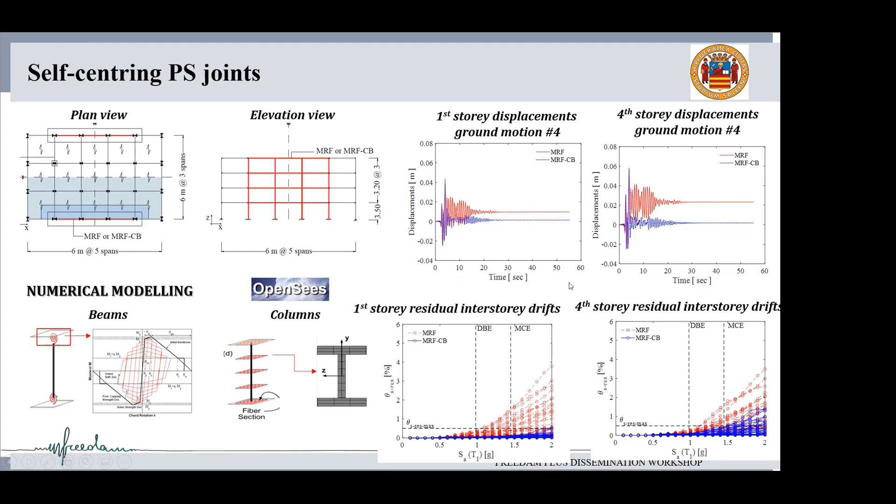So what's coming next, as kindly introduced by Jean-Pierre, is that we are now working with the same team, the original team of the FREEDAM project, on a pilot and demonstration building. This will involve the design of a 3-story building on the campus of the University of Salerno - a real building that will be used as a laboratory and for office space.

Our idea - and it's not only our idea, we have to complete this project by 2024. Next year we should start construction. We are now in the engineering phase, designing all the elements.

This project will be a bit of a state of the art from many points of view - from seismic resilience, but also from the strategies implemented for the sustainability protocols that will be applied in this building.

So I've concluded. I don't know if I took more time than I had, but in any case, I thank everyone for the attention and for attending the webinar. Thank you.

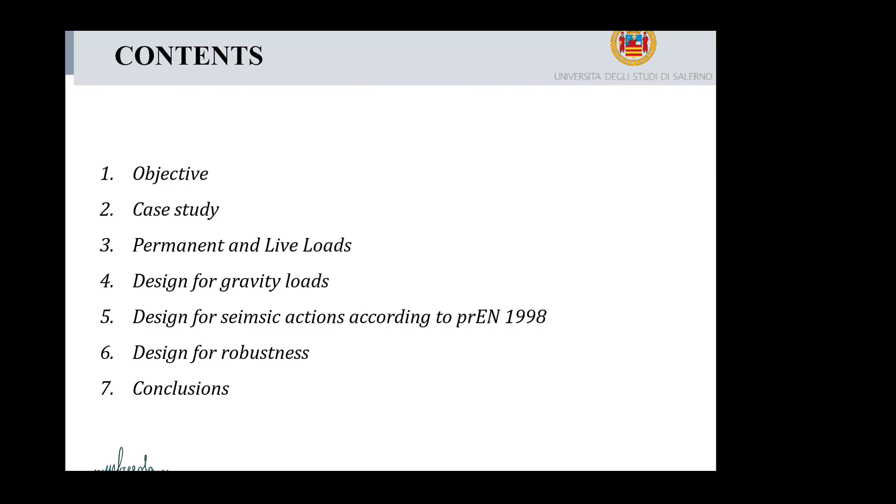I will try to go with you now briefly through a worked example on an MRF designed according to Eurocode 8. This example will illustrate step by step the design procedure for such a structure. What is worthy to notice is that this structure is being designed for ductility class 3, which is the most exigent requirement in ductility as given by Eurocode 8.

We are going to start by presenting the main characteristics of the structure. Here you can see the plan view of the structure. What you can notice is that the perimeter frames are the lateral load resisting frames. So these frames are, in fact, the frames that are supposed to resist the lateral loads, here the seismic action, while the inner bays of the structure are pinned frames, the beams are pinned.

So they are designed only to resist the gravity loads. Therefore, in order to design the lateral frames as lateral load resisting systems, we are going to consider that they have a tributary area, or the mass, the loads that are coming from the rest of the structure are going to be transferred to these perimeter frames.

The studied structure is designed to be for an office building. Therefore, according to Eurocode 0, it is categorized as the category B structure. And the steel grade used in all the elements of the building has been S355.

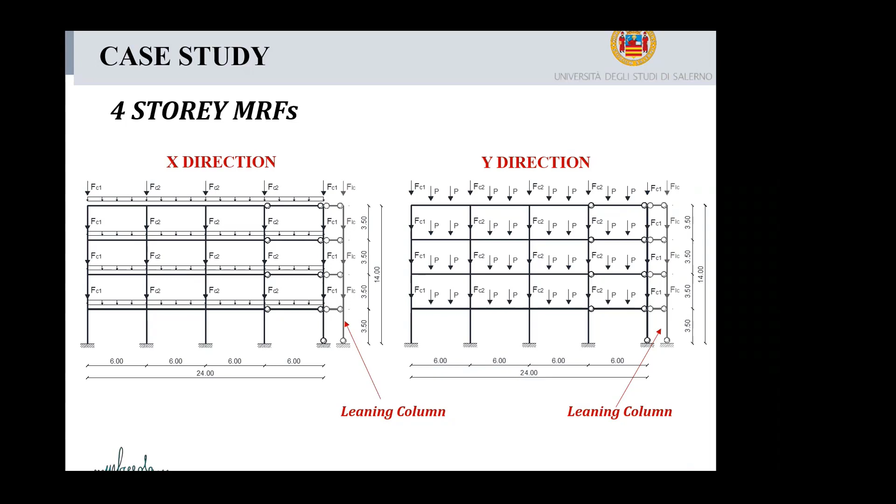Obviously, as you can see, based on the location of the beams on the secondary beams, the loads that are acting on the perimeter frames are different by their direction. Therefore, in the X direction, we'll have a distributed load on the perimeter beams, while in the Y direction, because of the position of the secondary beams, we will have some concentrated loads from 2 to 2 meters along the beam. So we are starting with the computation or estimation of the loads that are acting on the structure.

We are going to assume that the permanent structural load that is distributed on the floors of the structure is 3.25 kN per square meter. This comprises the self-weight of the elements and some of the non-structural permanent loads, which are coming from the insulation or the floor systems or the ceiling, which is 0.75 kN per square meter.

In conclusion, these permanent loads are leading us to a permanent load on floors and the roof of 4 kN per square meter. While on the perimeter frames, we are going to consider also some permanent loads coming from the external loads, from the facade loads, walls that are 1 kN per square meter of the facade.

The live loads are considered according to Eurocode 0 and 1, corresponding to an office building, which in this case we considered as being 3.5 kN per square meter, while for the roof, a live load was considered as 3 kN, being lower than the current floors. And in the ultimate limit state combination for gravity loads, this leads to a current floor load of 10.7 kN per square meter, while for the roof it's around 10 kN per square meter.

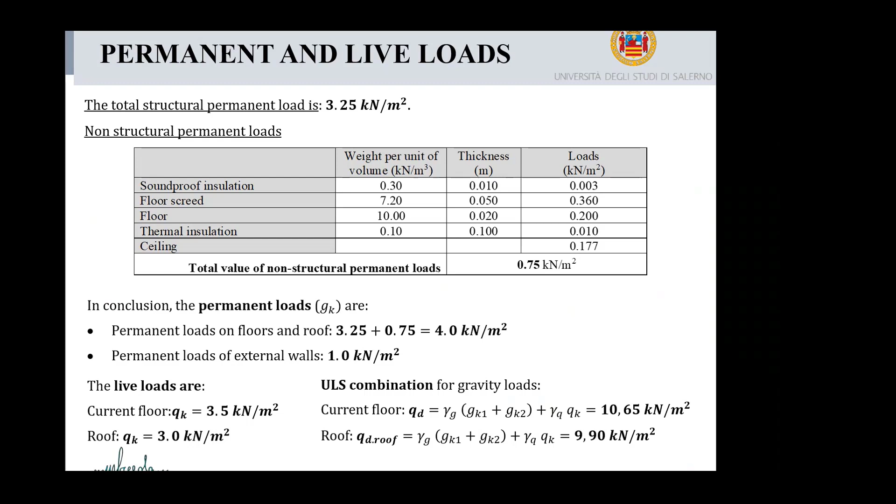Hence, based on the previously estimated loads, we can now design the beams for the gravity loads, and these are going to be the interior beams, which are supposed to take only gravity loads. By distributing the previously estimated loads on the beams, we reach a bending moment of 96 kNm, which in terms of resistance requirements would lead to an IPE 220 profile, which is once again made out of S355 steel.

But based on the requirements of vertical deflection, maximum allowable deflection, this profile has to be increased up to IPE 270.

For what concerns the primary beams, based on the previously already estimated loads coming from the internal secondary beams, the maximum bending moment acting on the primary beams is around 256 kNm, and this gives a strength requirement corresponding to a profile of IPE 330.

But once again, based on the requirements of the vertical deflection, we had to increase this profile up to IPE 360.

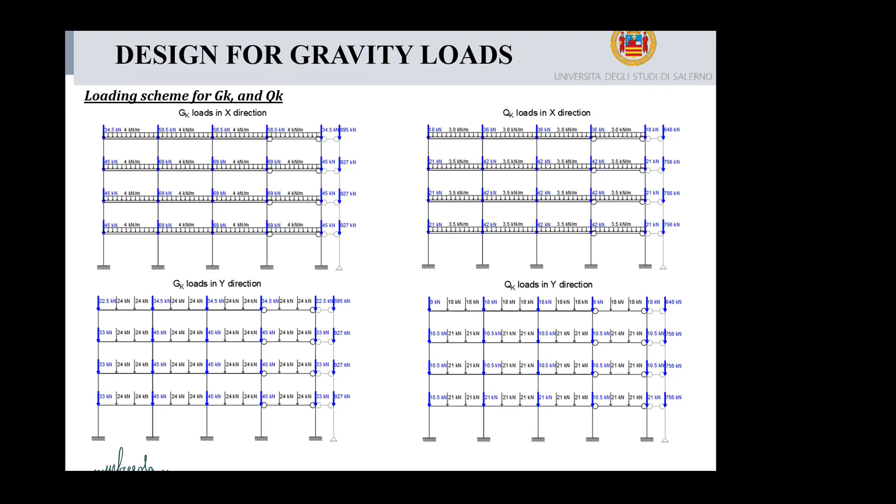We are going to start designing the structure for seismic actions according to Eurocode 8. The design standard states there are different requirements or performance targets to be satisfied, corresponding to different seismic intensities, which Eurocode 8 classifies as frequent earthquakes, occasional earthquakes, rare earthquakes, or very, very rare earthquakes.

For these types of earthquakes, there are four corresponding limit states. The fully operational limit state is obviously the one in which the building remains in operation. The others correspond to an already damaged building that has been subjected to seismic action: the damage limitation limit state, the significant damage limit state, and the near collapse limit state, which is considered for the very, very rare earthquakes.

To design a structure against seismic action, we consider the already introduced concept of the response spectrum. Professor Plumier has already presented the elastic response spectrum, but here we have two types of spectrum to consider.

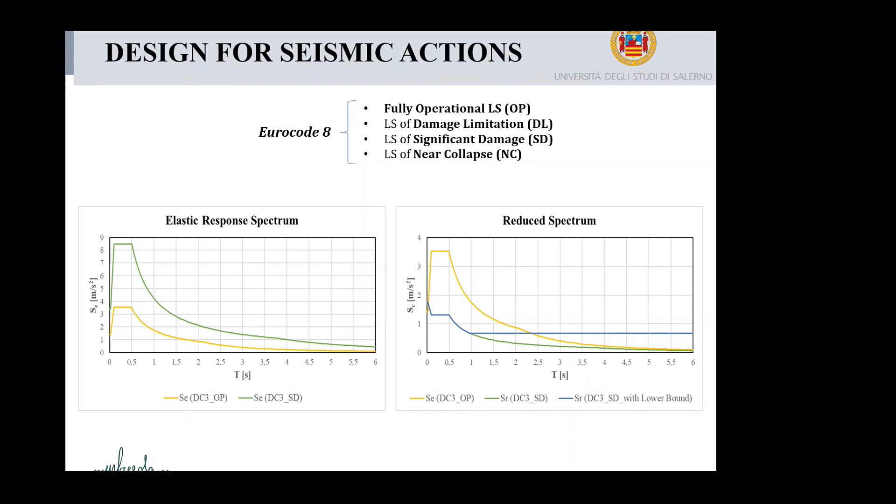For very frequent earthquakes, or lower seismic intensity, we intend not to activate these dissipative devices, so the structure responds elastically. Therefore, we design the dissipative zones, the FREEDAM joints, according to the operational limit state design spectrum, which is not reduced - it's an elastic response spectrum - while the checks for the non-dissipative members and the interstory drift checks are done taking into account the dissipative characteristics of the structure, using the reduced response spectrum.

In order to design the structures explicitly, they were modeled in the SAP2000 software, which allows modeling the elements as linear elements, and allows integrating nonlinearity of the material and nonlinearity in terms of geometrical discontinuities. In this software, the joints were modeled as rigid zones with account for the end length offset.

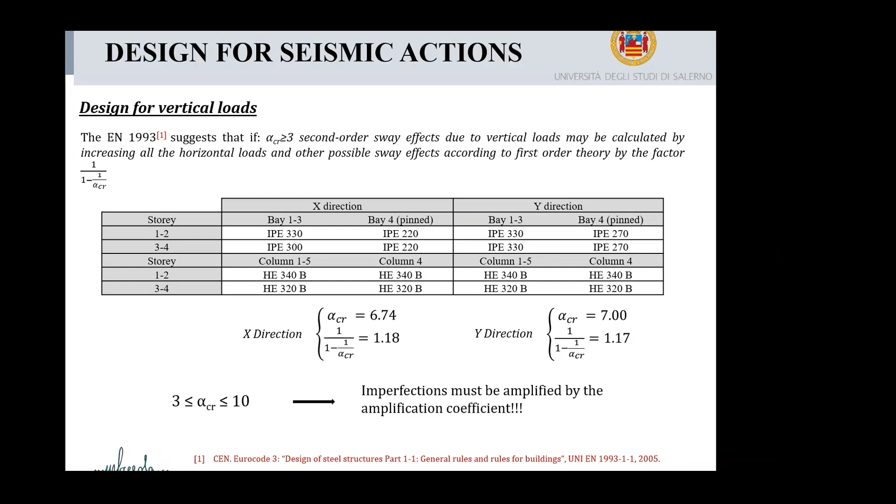The M-slip design resistance of the joint corresponds to the onset of slippage in the dissipative device. So we account for the friction resistance of the dissipative device to design the joints, such that the design resistance of the joints matches the design bending moment I mentioned previously, which is based on the operational limit state.

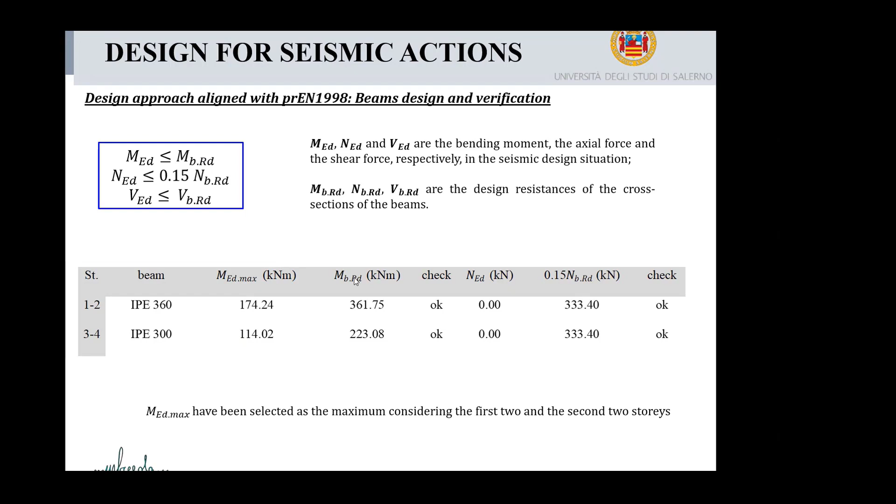For the verification in terms of shear resistance, things are a bit more complicated because the shear force that acts on the beams has to be computed based on the shear force coming from the non-seismic load combination, plus the component that comes from the overstrength of the dissipative zones at the beam ends. So we have a component VED, the design shear force, coming from the non-seismic actions, plus the component coming from...

the slippage resistance of the joints, where once again we take into account an over-resisting factor of 1.50, accounting for material overstrength. This has already been experimentally and numerically proved in previous research. Based on all of this, what were at first assumptions are now certainties. We can check the capacity of the beams in terms of bending, axial, and shear resistance.

Based on the previous computations, as we stated before, we have to ensure once again that the capacity design principles are respected. Here we rely on the equilibrium of the nodes and on the overstrength of the dissipative zones, which here are the FREEDAM joints once again. So we rely on the slippage resistance of these joints, accounting also for an overstrength factor omega Rm. By making this equilibrium, we reach values lower than the plastic capacity of the joints, considering the actual load in the columns.

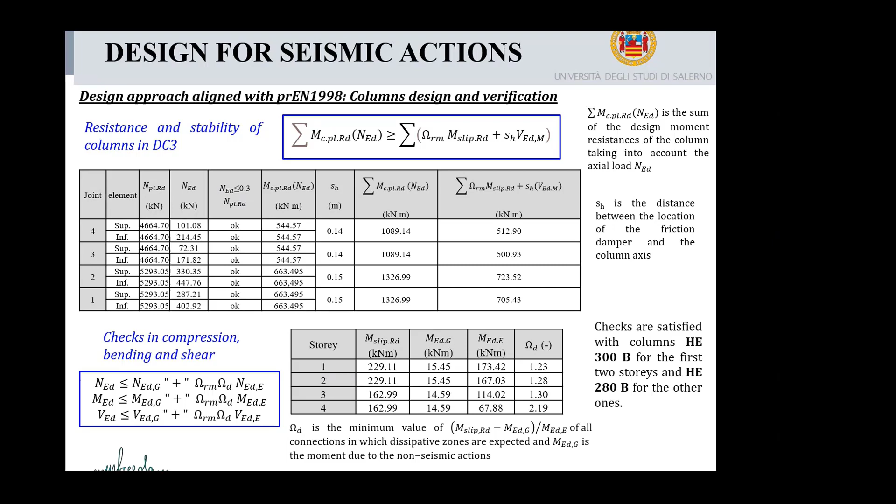So we assume that sections of HEB 300 and HEB 280 for the columns will fulfill these requirements. Please note that there are two types of sections for the columns, because we consider that the beams and columns are the same for two consecutive floors. So, for example, the first and second floor have the same member sections, while the third and fourth floor again share the same sections between the two.

Another condition to be respected according to Eurocode 8 is to control the second order effects. Here the condition is that if theta, which accounts for the second order effects, is lower than 0.1, the condition can be neglected, while if it's between 0.1 and 0.2, it can be approximately considered by multiplying the relevant seismic actions by a factor equal to 1 over 1 minus theta. We can see that for each story of the structure, we achieved a theta greater than 0.1, but still below 0.2.

Conservatively, a theta max amongst all the stories of 0.13 has been achieved. So we are going to use an amplification factor of 1.14 for the second order effects to be considered in the design.

The last check to be considered is the interstory drift limitation, and this can be, most of the time, actually at least in reinforced concrete structures, a very demanding requirement. A lot of designers didn't check it, and while checking, they realized they would have to change the sections of the members.

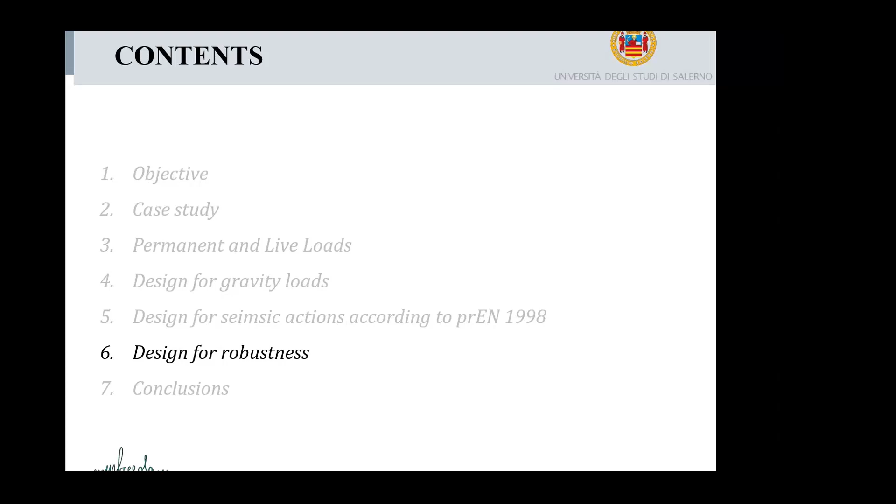Now that we have more or less completed the design for seismic actions, even though I went through it very briefly, you can go into more detail using the deliverables of the project, because there are a lot of structures designed according to Eurocode 8 and also according to another theory, the theory of plastic mechanism control, which is also used in seismic design. But I would like to go briefly also through some slides that may have a very significant influence on the overall response of these structures.

And moreover, in robustness investigations, joints could prove to be a key element to be investigated, because, for example, in a very rare seismic event or under a very severe accidental action, we can expect that the requirements in terms of lateral loads would be great, and the joints should prove to have sufficient rotation capacity in order to allow for these displacements, either lateral or vertical. So they are key elements in such investigations.

Why we are talking about robustness? Because in Eurocode 0, it states that a structure should be designed and executed in such a way that it will not be damaged by events such as explosion, impact, and the consequences of human error to an extent disproportionate to the original cause.

And the next clause of the code says that we can reach such structures that are able to survive these events by avoiding, eliminating, or reducing the hazards, by selecting a structural form with low sensitivity to the hazard, or selecting a form and design which can survive the removal of individual or limited parts of the structure, so that progressive collapse is not triggered, and also to avoid systems that collapse without warning, so that we avoid brittle failures. The last requirement, one of the minimum requirements of the code, is to tie the members together, meaning we provide continuity between the members, horizontally or vertically.

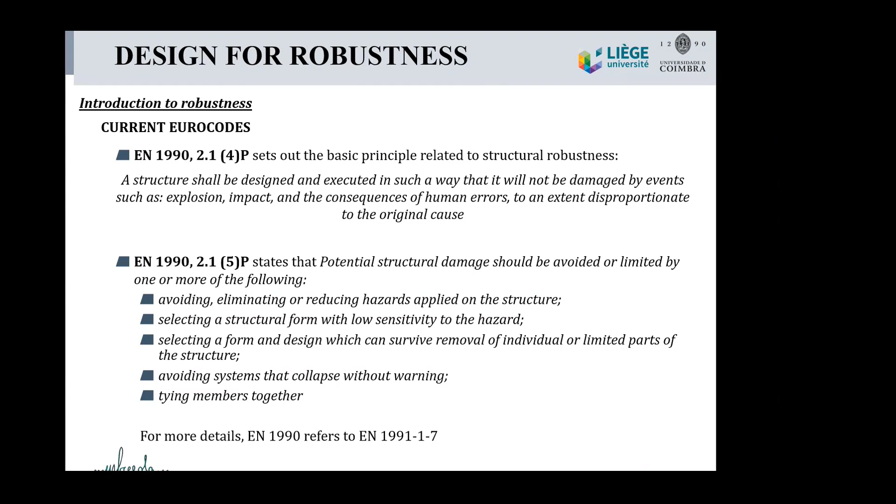And after, the standard just refers the reader to Eurocode 1 Part 1.7, which is the Eurocode that deals with the design against accidental actions. This design standard defines robustness as the ability of a structure to withstand events like fire, explosions, impact, or the consequences of human error without being damaged to an extent disproportionate to the original cause.

So you can see the relation between the definition of robustness in Eurocode 1 Part 1.7 and the requirement stated in Eurocode 0. What robustness means in this case is that once subjected to an exceptional event, the structural response can evolve into two different scenarios. The first one, the structure or part of the structure can collapse, or the structure survives the event even though with permanent displacements, permanent deformations, and so on.

And the questions arising from these two scenarios are how to prevent the collapse of the structure and how to ensure that the structure survives the event even though with significant deformations or damages. And the answer to these two questions is given by the concept of robustness.

And in order to design a structure for robustness, Eurocode 1 Part 1.7 provides the designer with two main categories of strategies for design. The first category are strategies based on identified actions, so we are identifying an accidental action and designing explicitly the structure to resist this action. The second category of strategies is based on limiting the extent of localized failure, meaning that with this category of strategies you are going to cover a wide range of possible accidental events. Therefore, it is of main interest when we are designing structures to be robust.

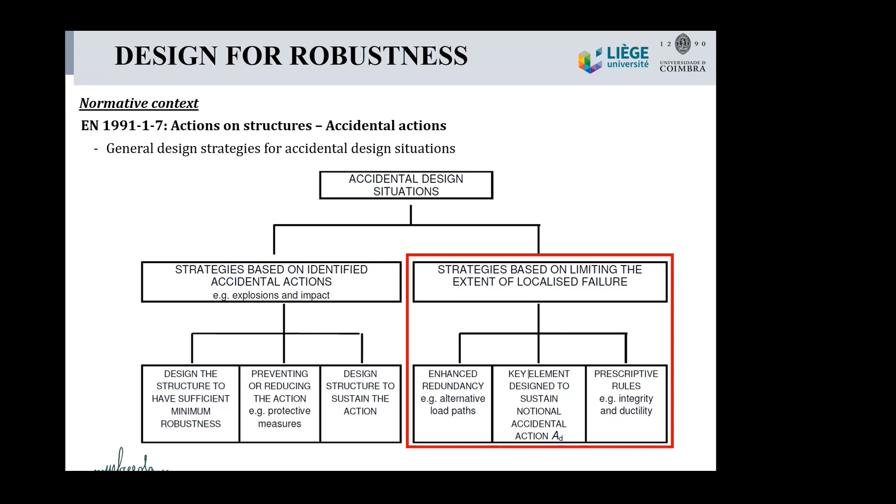However, in order to design a structure explicitly for robustness, we are going to rely on the concept of consequence classes, which is introduced in Eurocode 1 Part 1.7. Here the structures are categorized according to their occupancy, their height, and the risk that is associated to their failure.

So according to this table that is provided in Eurocode 1 Part 1.7, we can conclude that our structure is class 2A, or lower risk group structure, and therefore for this consequence class structure, the code prescribes minimum requirements for robustness—this is again the prescriptive rules—which implies that we have to ensure the structure with horizontal tying, or horizontal tying resistance.

If you study the deliverables of the project, you will see that we designed structures with 4 stories and 8 stories, and those with 8 stories are classified as CC2B structures. For this class of structures, the code requires applying the notional removal of supporting elements method, to demonstrate that the structure can provide sufficient and adequate alternate load paths in case of these events, so that the structure survives the removal or loss of a supporting element.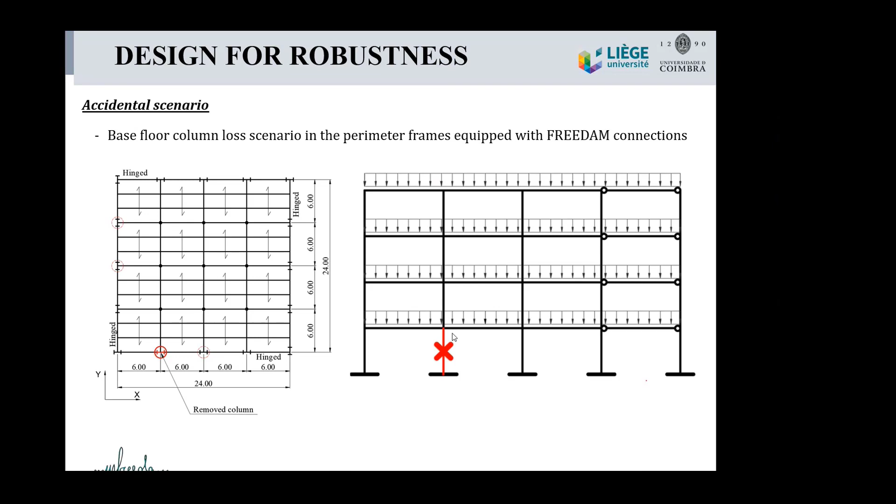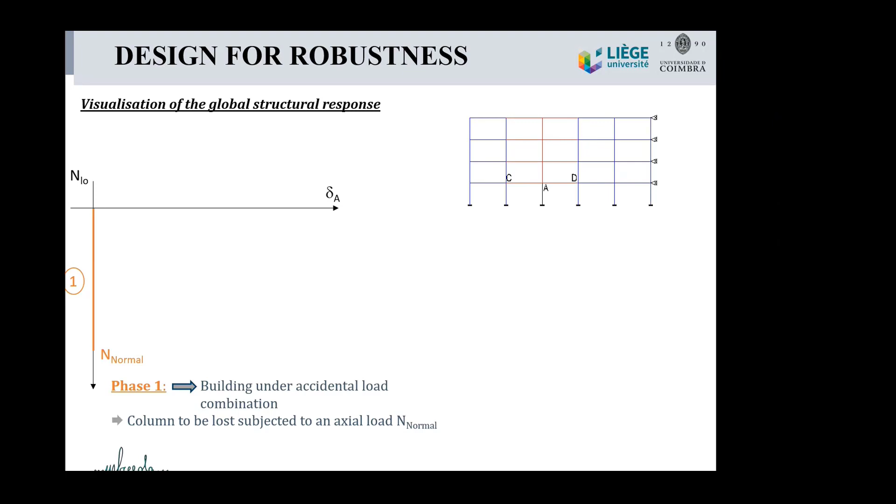From the theoretical background, we can already expect that the structural response would look as follows. The structural response in case of a static column loss can be assumed as a 3-phase process. The first phase corresponds to the situation when the column is subjected to the normal axial force, called normal because it's the axial force that is normally applied to the column in the accidental load combination.

Phase 2 starts when the column begins to be lost, meaning it is removed statically. You will have a first branch of behavior in this phase being elastic, while at a certain point the stiffness drops, corresponding to the first formation of the plastic hinge. At the end of phase 2, we reach a global plastic mechanism in the directly affected part of the structure. This continues with phase 3, which corresponds to the development of significant displacements in the structure, and also the occurrence of significant second-order effects.

The catenary action that develops in the beams of the directly affected part, if the beam ends or connections provided are resistant enough and ductile enough, can provide alternative load paths for the loads to be distributed to the rest of the structure. So the structure can survive the event, reaching a point where the response corresponds to equilibrium. The structure reaches an equilibrium in a large displacement, large deformation field.

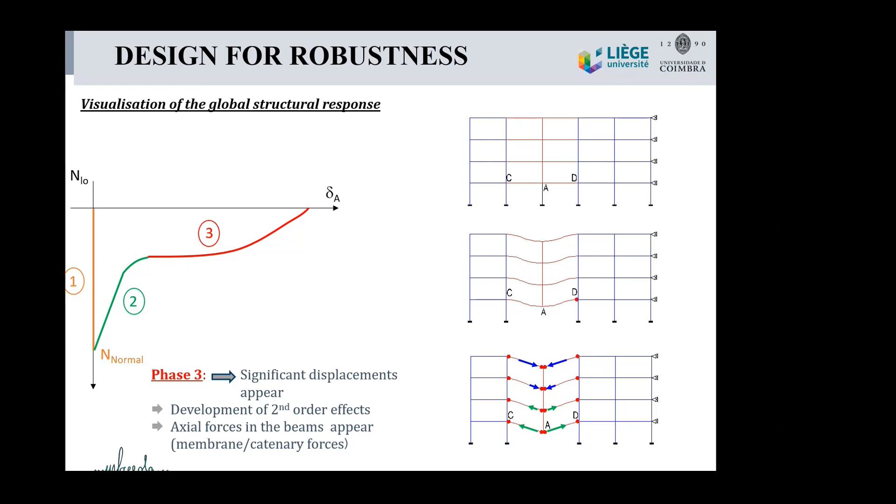This response can be investigated through a push-down analysis, which can be seen as a pushover analysis, with the main difference that the load is applied downwards, so it's a vertical force.

In order to simulate the column loss in a frame, we can replace the column with a reaction, here ND or N normal from the previous slide, which corresponds to the axial force in the accidental load combination. After that, we apply at the same node, at the upper node of the lost column, an incremental force ND, applied downwards, so that we remove the column statically.

If the ultimate force reached by amplifying the ND with lambda, the load factor, reaches a level higher than the normal axial force in the accidental load combination in the column, the structure can be assumed as robust. While if the ultimate force reached further to the column loss in the structure is lower than the normal axial force in the lost column, then the structure can be considered not robust enough, and so the collapse is triggered.

So we did this process for the analyzed frame, and you can see here the response of the frame is...

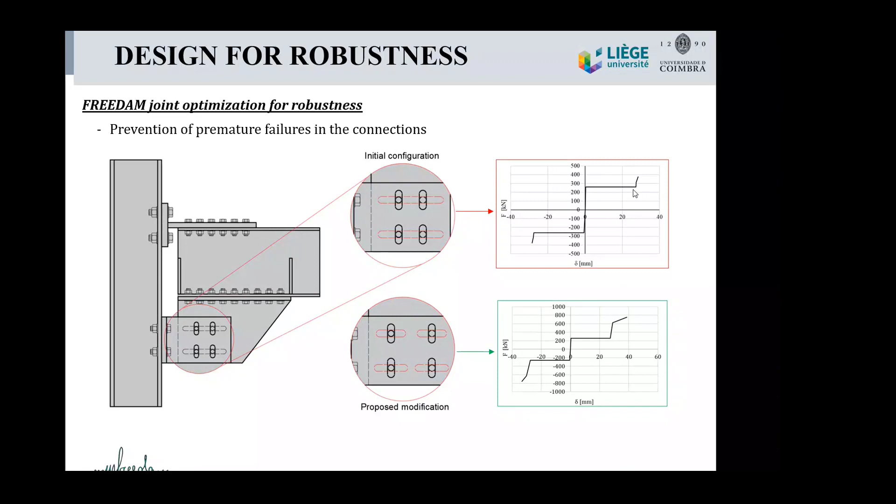And you can see that the response of the device is not tremendously enhanced by doing this, but when we integrate this change into the structural model of the building, the difference is huge, meaning that if previously we reached a resistance of 430 kilonewtons, now we are going above 800, which is almost double the initial configuration.

Here we can assume that now the structure is robust enough to withstand the assumed column loss. Even though the collapse occurs once again as a result of the bolt rupture in shear in the FREEDAM devices, some plastic deformations also occur at the beam ends, meaning that we reached the plastic resistance of the beams, predominantly at the first floors of the structure.

So in order to conclude, here we went through the design of moment resisting frames equipped with FREEDAM joints, previously designed for seismic actions. From what I've done for this structure in particular, I designed it for robustness.

I think you could notice during my presentation that I was going more in detail for the robustness part. However, the FREEDAM joints allow the structure to dissipate the seismic input energy through friction in the damping devices, and so they lead to less demanding requirements according to the seismic capacity design principles.

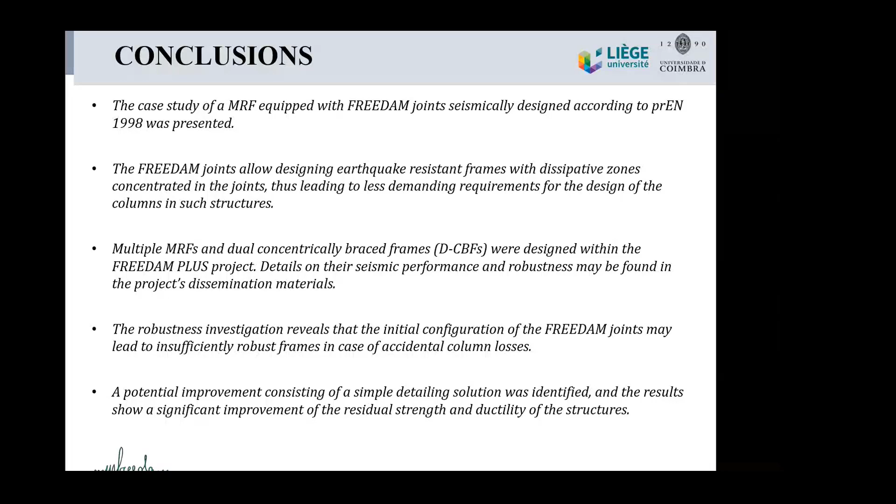While the robustness investigation that I presented here revealed that the initial configuration of the joint as proposed has not been properly tuned for robustness purposes, and you saw that the structural response of the building equipped with FREEDAM joints at first was not adequate for robustness investigations. After the slight modification of the dissipative device, we reached adequate response and the structures were robust enough to survive the event.

So thank you very much for your attention. Sorry if I went a bit more than what was expected.

No problem. You did it well. Oh, there is an echo. Please, are all the microphones muted? Yes, no, you did it well because you had really many things to say in a few times. So thanks for illustrating this design.

I would just emphasize again that to reach the robustness of a structure is not always a problem of supplementary cost. You see that sometimes the detailing, and especially the detailing of the connection, is just enough to be robust or not to be robust.

Anyway, we come now to the last presentation, which will be made by Jean-Francois Demonceau, my colleague at the university, who is associate professor. He will tell us how we can practically design the FREEDAM joints. We know that the design of connections is sometimes time-consuming, so it was important to provide designers with tools which allow minimizing the time for design. So he will explain what has been made available inside the FREEDAM Plus project. So the floor is yours, Jean-Francois.

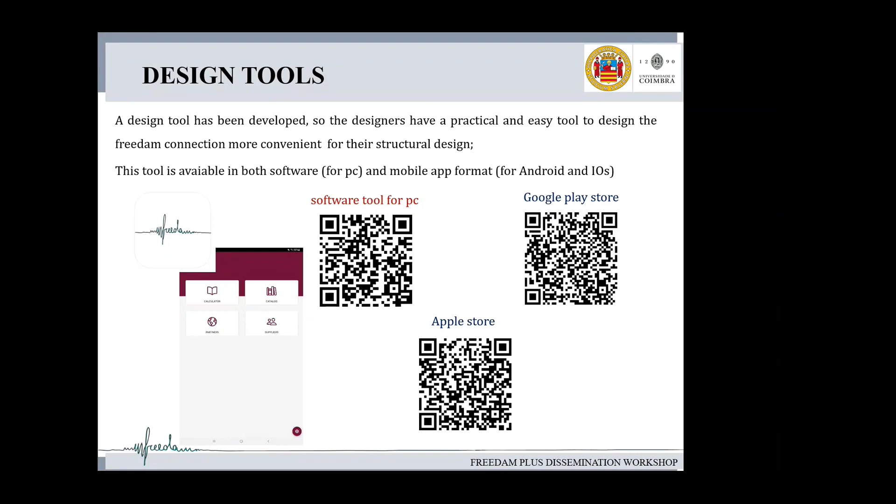This user-friendly software is available on different platforms. It's available on the PC, in the framework of an interactive web page. But also, we decided to propose this application on Google Play and on Apple Store, so you can have this application on your mobile, smartphone, even a numerical tab and so on. You will see that this tool is quite simple to be used.

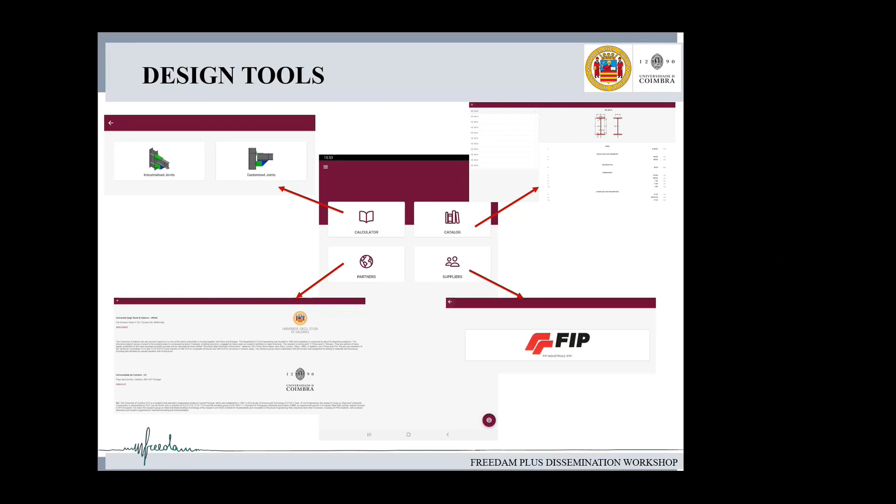The main page of this tool is divided into 4 parts. The main part, related to the calculators, is where you will be able to compute the FREEDAM joints. The second part is dedicated to catalogs, where the main properties of the different profiles that can be used with the FREEDAM joints are provided. Then a reminder of the different partners involved in the FREEDAM joints project and who contributed to the validation of these solutions. And finally, you have the main supplier for the FREEDAM joints connection, which is FIP company, an Italian company.

Also, on this app, you have secondary options where you can have links to the different web pages that I mentioned previously. But of course, as in all applications, you have access to a user manual which explains how to use the application.

Now looking at the main part of the software, which is the calculator, you will see that this calculator is subdivided into 2 parts. The first part is dedicated to 5 industrialized FREEDAM kits. We are proposing in this application the use of 5, we could say, pre-qualified, pre-designed FREEDAM connections, which are valid for a certain range of beam solutions. As they are pre-qualified and pre-designed kits, they are linked to some assumptions that should be respected.

The first assumption is that only S355 steel grades can be used for all the members. The considered cross sections for the beams are limited from IPE 270 up to IPE 750. The slip coefficient used for the friction dampers is 0.53, which is related to a specific material used for the friction pads in the damper.

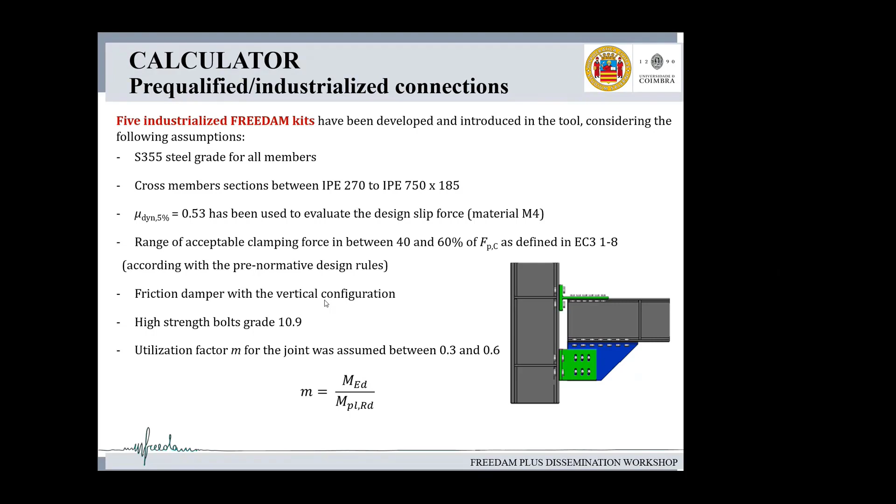of the beam. Here are the 5 FREEDAM kits which are industrialized and proposed, and you see that the differences between the different solutions are related to the number of bolts used at the level of the damper, differences in the bolt diameter used, and the dimensions of the hammerhead connected at the bottom flange of the beam.

So here is a table reflecting the solution which will be proposed if you use the application. You see that according to the utilization factor you consider and according to the beam connected to the column, you will come to different kit solutions proposed for your structures.

This was the first part of the calculator. The second part is dedicated to the customized version, which means you can decide to tailor your specific FREEDAM joint solution. There, you will have to introduce additional information compared to what is required for the pre-qualified, pre-designed FREEDAM kits. But anyway, the software allows you to define your own FREEDAM solution going outside the range of validity of the previously presented FREEDAM kits.

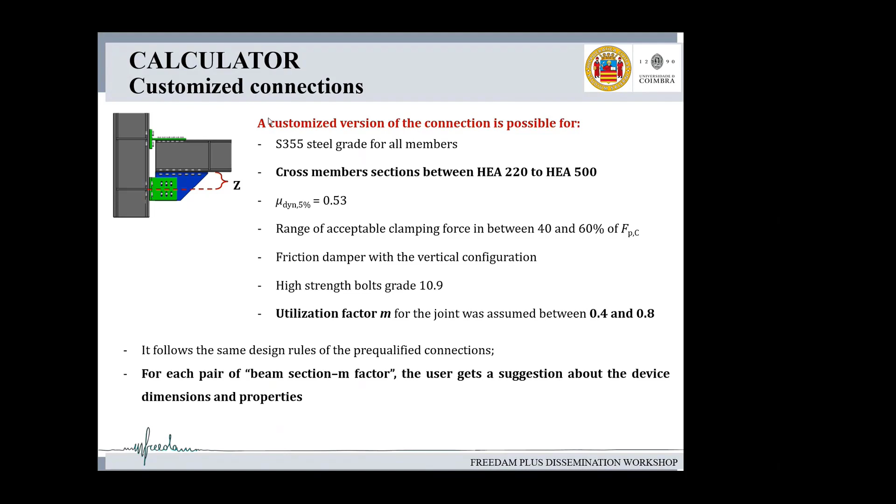So here is a worked example proposed in the presentation, but I think the easiest way to proceed is to directly show you how the FREEDAM tool is working. Again, for sake of completeness, I will add the link to this application in the chat.

So if we go into the calculator, you just click. We will use the industrialized joints. You have to select the beams you are considering for your structures. Let's assume we will consider the IPE 500 beams. You have to select the steel grades. You see that for the moment we are limited to S355 steel grades.

Why? Because I see a question on that in the chat. It's just because the solutions have been validated within the framework of the FREEDAM joints for this steel grade. Also, in terms of possible overstrength, with this steel grade the overstrengths are quite limited, while if we use S235 steel grade, the overstrength of this material could be higher, leading to a significant over-design of all the non-dissipative parts of the joint, which is not really economical.

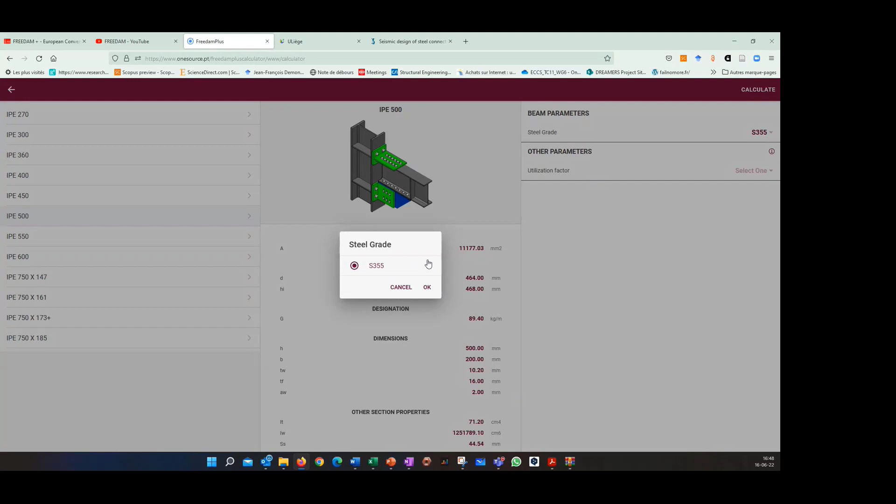So, selection of the steel grades, and then at the end we have to select the utilization factors. Let's assume that the bending loading is equal to 50% of the plastic resistance of the beam. We select this one, then you just have to click calculate.

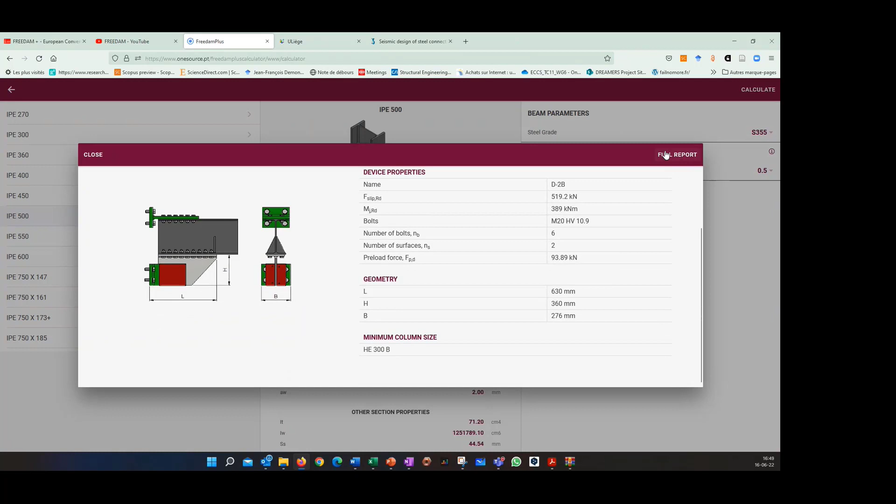And then you have a summary of the FREEDAM kit suggested by the software. It is kit D2B, with the main properties of this kit, number of bolts and so on, and the preloading to be applied at the level of the bolts of the FREEDAM damper. If you want more details, you just push on full report, and you directly get a PDF file with the complete report, with all the details of the proposed kit and all the details about the main computations performed for the definition of the FREEDAM kits.

So, in conclusion to this small presentation, nowadays a user-friendly tool for practitioners is made available on the web, but also through the different stores on smartphone. The tool allows the use of pre-qualified FREEDAM joints or the use of customized joints. And last but not least, the tool is available for free. So you can easily download it through the stores if you want to install it on the smartphone, or you can use directly the tool through the links I just sent on the chat if you want to use it through your web browser on your computer. So thank you very much for your attention.

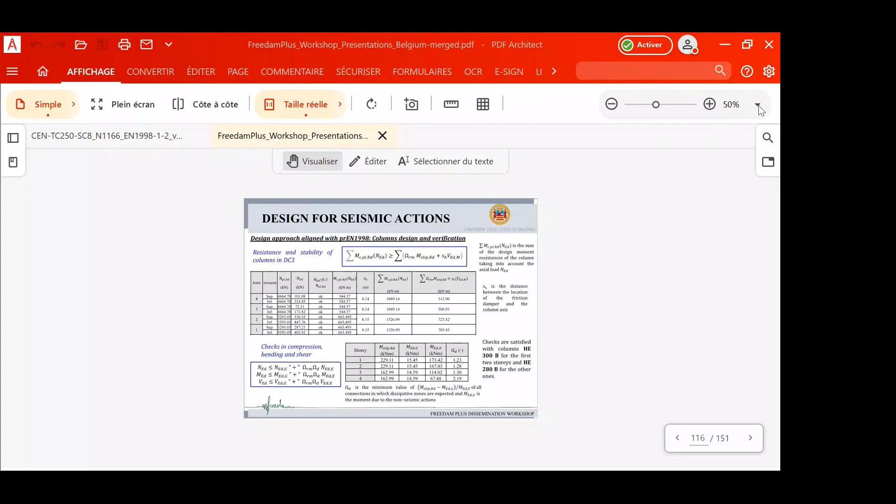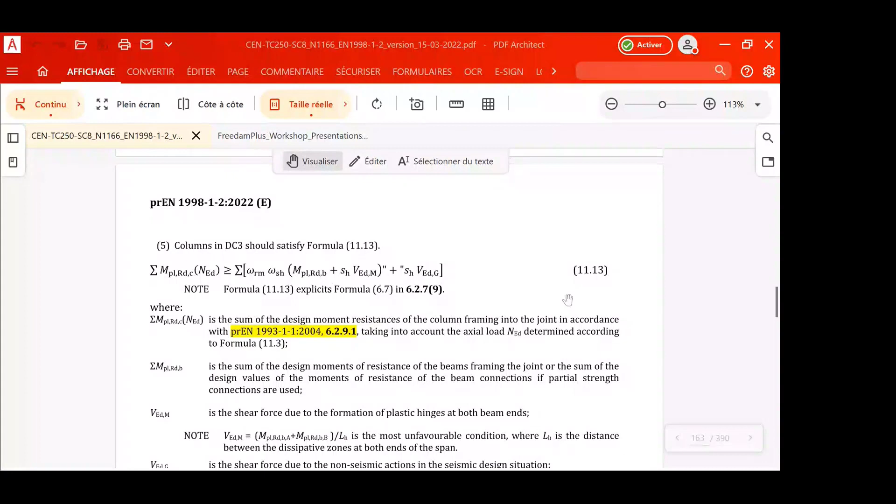In the design example by Golea, there is this expression for the check about columns. I know it's difficult because the document he refers to is still evolving, but there is only this omega RM which takes into account the randomness of material provided on site. But this formula has evolved recently, so there is an omega strain hardening in addition. I just say this so that in the documents you finalize, the thing be correct. If there is a problem, it's too fast now to give an answer to this, but I think there may be a problem.

That's always the problem when we try to be up to date. We are using the latest draft of the norms, but as you are saying, these drafts are still evolving, so for sure, when everything will be fixed, we will have to make an update of the worked example.

I would like also, yeah. Well, this has logic because in this expression shown, there is not this 1.3 of the classical formula. Now the omega RM may take that into account, but the strain hardening is not in. So as you say, this should be corrected at a later stage.

So we are close to the final stage with this document these days. Thank you, thank you. I am just checking the document, and it seems that in the meantime it has been revised. So the results that I was reporting might be for a previous version of the document.

Yes, but for those who would not know it, when the code is revised, because we are close to these revision committees, it may change from one day to another day. So it's difficult. Well, this last document that I have shown is from the end of March this year, so that's only, you know, not even two months ago.